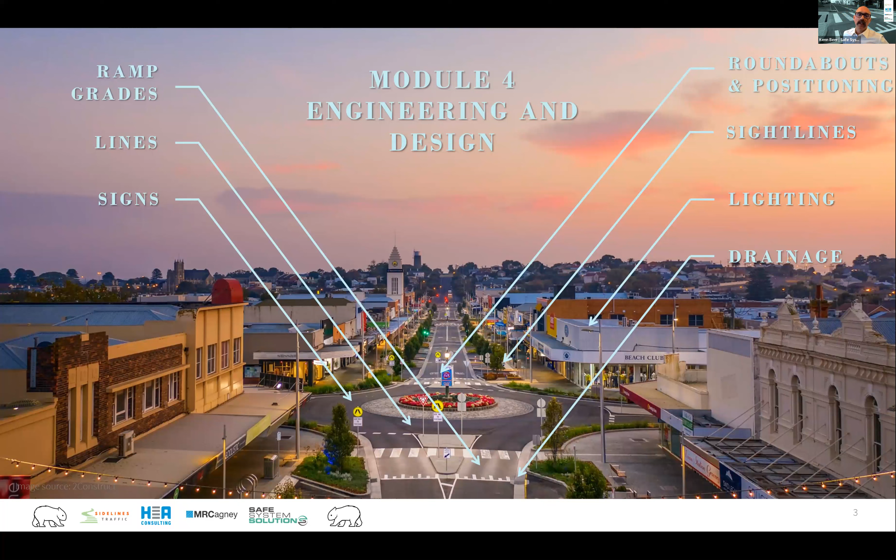So thinking about where we position them and some of the considerations—lighting and drainage I'll touch on briefly, and pavement as well, fairly briefly, just to give a few key insights. We better get into it.

I think Hafez, Prue and Bridget have done a really good job talking about design objectives at these different levels, from strategic planning objectives all the way down to general design objectives. I'm drilling in a little further than that.

We want to locate the crossings on pedestrian desire lines—the point where pedestrians generally want to be, that's the desire line. For pedestrians and cyclists, cyclists will go a little bit further off the desire line than a pedestrian will, but still we want to try to ensure that efficient, direct route. We've got to really factor that into our consideration.

We've got to think about all road users. I think Bridget hammered this home so well that I don't need to cover that further. High alignment with safe system principles means thinking about human tolerance to physical force, thinking about mistake-making, and thinking about some redundancy in the system. Hafez covered that quite nicely.

Then there's this idea that we want to think at a network level, about connectivity—Hafez's beautiful exercise of walking through, rather than just saying well we'll have one there and one over there, disconnected. We need to think about consistency along a corridor. So there's some overarching objectives.

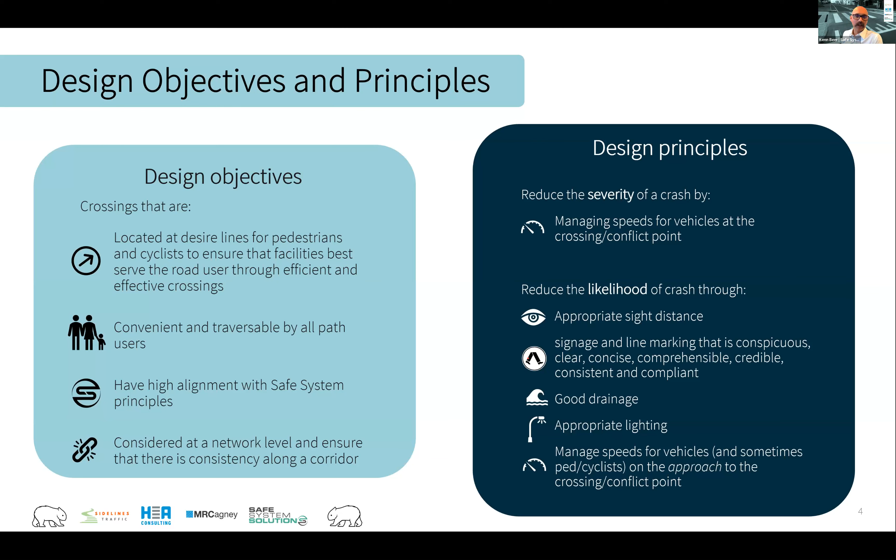Keep your questions coming in, and Hafez, at any time just jump in, because I'll just keep motoring on. So you're going to have to jump in on me at any point.

Let's start with one of those likelihood factors: sight distance. Sight distances to pedestrian crossings have been the point of recent debate at an Austroads level, with lots of Australian and New Zealand discussion going on. There were some recent changes in the Austroads Guide to Road Design, which I officially complained about, and they've now agreed to change them. I'll explain the approach they took as I go through it, and I'll explain both approaches so you can think about how to understand the sight distance requirements we've got.

Now you're all getting pretty good at the thumbs up or scary face on the Wombat. Here we go - we're up in Queensland, and we've got 2 carriageways approaching a zebra crossing, a pedestrian crossing. I just want you to give a thumbs up if you're happy with it, or thumbs down or a scary face if not. Oh, people are scared of this.

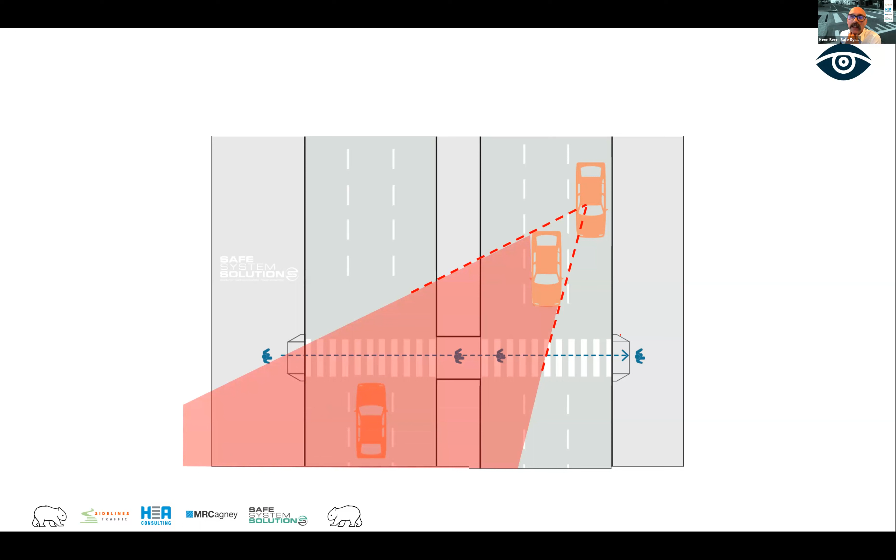Let me explain why that's an issue. If you've got multiple lanes - I've done this with 3 lanes to really highlight it - you can see pedestrians crossing with a car trailing behind. They have quite a big dynamic visual obstruction, what we call masking. So there's a whole section of that crossing they can't see. And if that car slams on the brakes because somebody's coming out, this other car may continue through, and we get that conflict. That's the concern.

What about this one? Now we still have 2 carriageways, 2 lanes in each direction. This one's on the approach to a roundabout, but this could work mid-block. You see here the other carriageway, and we've got our 2 lanes approaching a pedestrian crossing again. Let's see what we're saying - thumbs up or scary face, or type something in the chat if you want.

Looks like we've got a lot more people happy with it, Hafez. Yes, but you're creating some mixed views here, Mr. Ken. What is happening here?

For anybody still saying not happy with it, pop into the chat what some of the key specifics are, because there are always little tweaks that can be done. But overall, I'm much happier with this, because essentially we've taken that limitation - the dynamic visual obstruction, the sightline impediment of the other vehicle - and we've lessened it by providing a refuge island in the middle between the 2 lanes going forward.

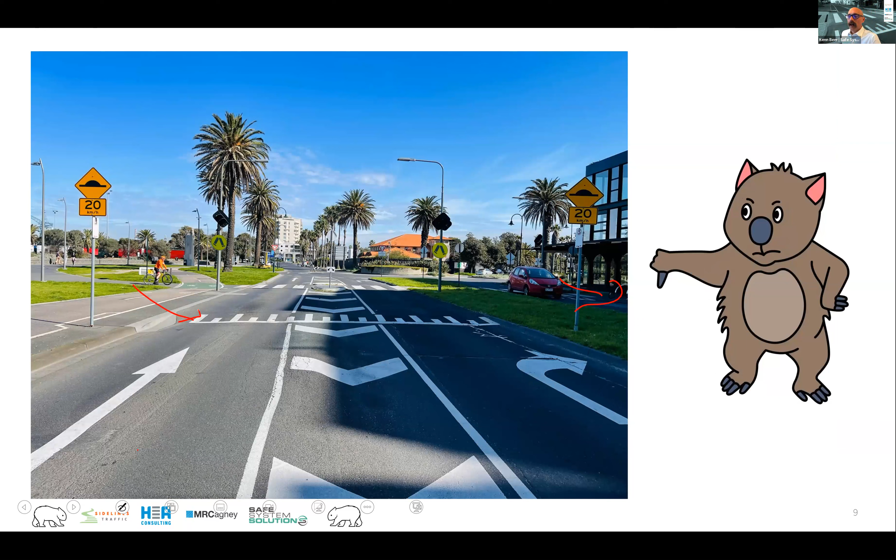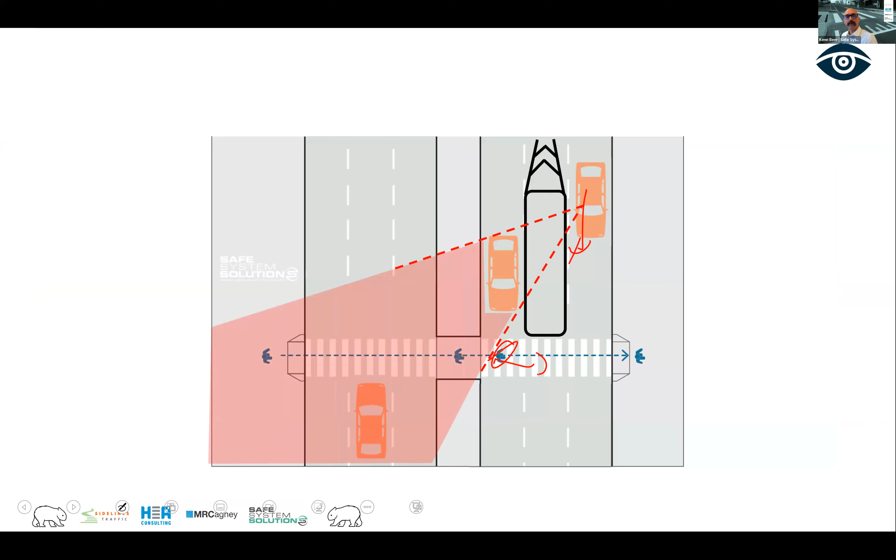So that was just the two-lane approach, which was the topic of a bit of discussion. I wanted to pop those in there so people had an idea. Of course, you can look to signalize a crossing. We talked about grade separation. The provision of an internal splitter island is going to be way cheaper than grade separation, even with your land requirements. But sometimes you really need to provide that continuity of flow for vehicles because of primary traffic route and the crossing for pedestrians.

Let's talk about sight distance and some basic fundamental sight distance on the approach to a crossing. I've got different types of sight distance up here. I'm going to take you through these. Some of you will get this as a refresher on sight distance calculations, some of you this might be the first time, so I'll go through from a very basic perspective. But we're thinking about approach sight distance, crossing sight distance, and stopping sight distance.

Safe intersection sight distance is the same formula as stopping sight distance, so some people might say that, but stopping sight distance is more appropriate to say in this situation.

Some key parameters we talk about for a pedestrian crossing, raised or not raised, a 1.6 meter setback. That's a point that's taken, and for the life of me, I can't tell you why it was picked exactly at 1.6. I will give a prize out to anybody who can tell me why 1.6 was chosen. I've always used it, it's in a lot of design standards. The other ones are 1.2 meters a second as a walking speed for a pedestrian, that's a parameter we use. And then we use this height of 1.07. I can tell you why that 1.07 - that's the height of a person in a wheelchair, which is an important consideration. It also covers off kids as well. That's a parameter we use.

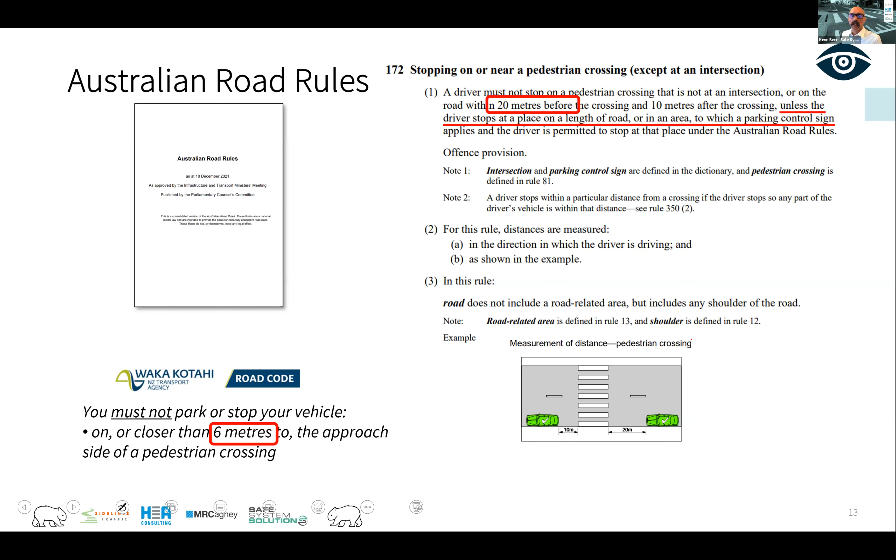Now in some situations this might be appropriate, but there are a lot of situations where it won't be. In some cases this is way too conservative, and we may not be able to get a pedestrian crossing or raised crossing in where we want it because people say we can't meet this sight distance requirement. In other situations it might not be enough, and somebody approaching will not have enough time to see, react, and stop if a pedestrian starts walking. So there's something to consider, but in both cases it clearly says you can deviate from this using parking control signs - we can just re-sign it out of that.

Okay, let's start by talking about approach sight distance. Approach sight distance is the same whether it's approach to an intersection or approach to a pedestrian crossing.

It is the driver's ability to see what is coming up and take appropriate action to the road surface. That's what we're looking at. So the driver should be able to see the line marking on the surface at the point they're looking, and we take that from a 1.1 meter driver eye height.

Within that, we've got reaction time, which we can use from the Austroads Guide to Road Design Part 3. We've got the operating speed, the 85th percentile speed in kilometers per hour of the vehicle. We've got a coefficient of friction or deceleration, which you make a judgment call on. And we're thinking about the grade, are we coming on a steep downhill or uphill? That's going to change things and factor things out.

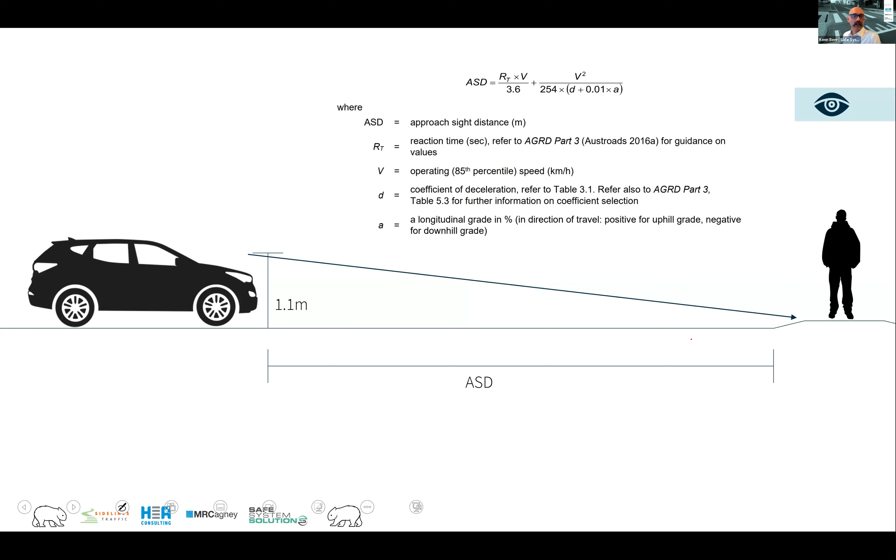The idea is that a driver approaching a pedestrian crossing should be able to see it in time to react, judge, and come to a stop if necessary. You might think that's pretty obvious, but if it's going around a curve, that becomes interesting in ensuring we can meet those sight distance requirements. So putting a pedestrian crossing around a sweeping curve is something we need to consider how we go about doing. Not to say you can't do it, just how do we go about it.

But let's use a straight road to talk about another sight distance requirement. This is what Austroads is currently requiring of a pedestrian crossing, and I'll explain why I don't think this is right. I mean, it's fine, it's actually more conservative, you're going to get bigger sight distances, but I don't think it's appropriate.

We use this thing called crossing sight distance, CSD. Crossing sight distance essentially says we've got our pedestrian here, and they're going to need to get from this point to this point. So the distance becomes important. We need to ensure they've got enough sight distance to see this vehicle and judge that it's going to stop, and that they've got enough time to get across the whole width of the road.

If you've got a refuge island, they need enough time to get to the refuge point. So the CSD, the crossing sight distance, talks about a critical gap in seconds, which is the length and the speed of travel of the pedestrian, which we talked about, 1.2 meters a second. They give a 3-second buffer in there now, and we talk about the approach speed of the vehicle.

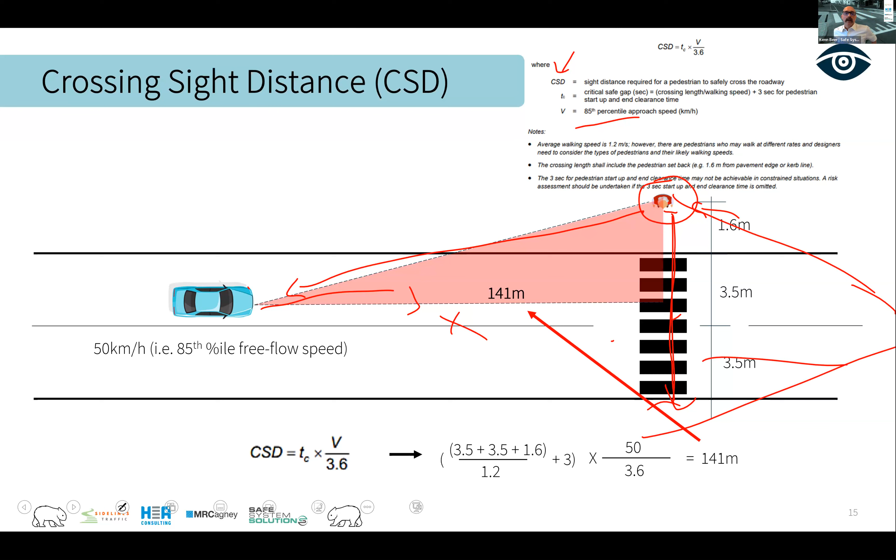Okay, so if we raise the crossing, they cross in both directions. Yeah, so somebody sort of said that. If we raise the crossing, this becomes interesting, then, doesn't it? Because what do we use as the 85th percentile speed? Right, so we had this 50 km/h, 85th percentile speed of free flow, but we know that they're not going to go over this crossing at 50 km/h, are they?

But their slowing down happens at a certain point along this road. So if there's no pedestrian there, for example, they're still going to slow, aren't they, to go over this? It acts like a local area traffic management device. It's a speed hump. Okay, so we need to now start thinking and factoring that into our consideration. So at some point, they're going to slow down regardless of whether there's a pedestrian or not.

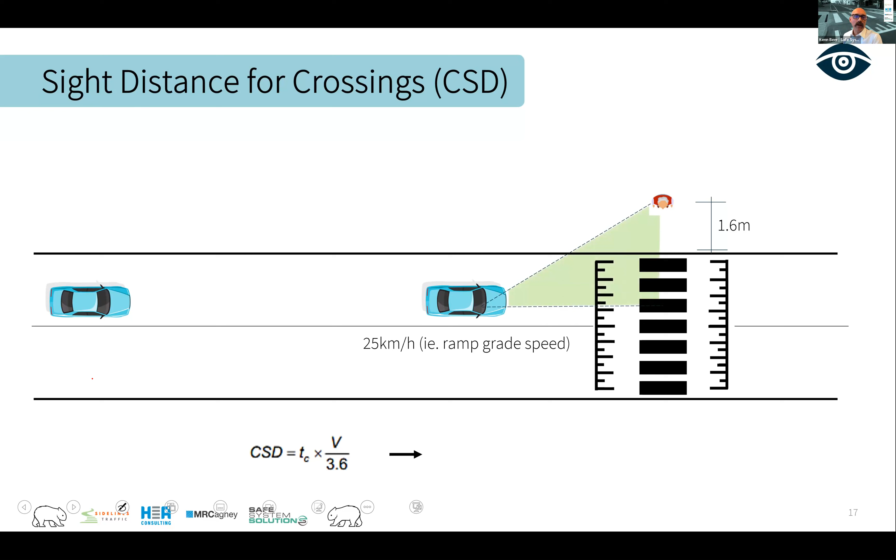And say that we've designed the ramp grade, which I'll talk about how we make this consideration later, to, let's say, a 25 km/h ramp grade speed. They should get down to that speed. And so one theory would be that you could just simply take a 25 km/h 85th percentile speed and use that for your calculations.

And then you could calculate that out at about 71 meters. So obviously my diagrams are exaggerating everything just for visual effect. Okay. But the reality of it is that, and I'll show this in a future slide, a vehicle sort of slows at a point and then makes a decision at a decision point. Okay.

The reason that this use of crossing sight distance is not appropriate for pedestrian crossings, and why I lodged my complaint which has been accepted with changes happening, is because the time it takes for the pedestrian to cross that road is irrelevant, right? The key thing is for that driver to see the pedestrian approaching, and then have a good amount of time to slow and to stop. Then it does not matter how slow they walk and how far they have to walk, because that driver waits until they're past and it's safe, right?

So while crossing sight distance provides bigger sight distance triangles, and that's great at an individual site, you go, great, okay, well, what's the harm of being able to see the pedestrian further back? Like, that's got to be good. That's got to be safer. The bigger the sight lines, the safer it is. Well, that's sort of true at an individual site.

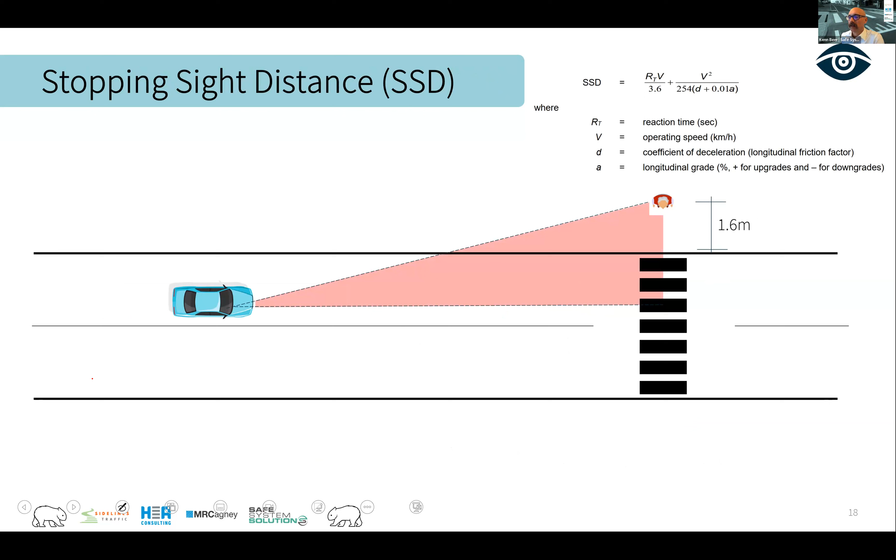Okay, Hafez, before I jump into this, let's have a question. So two questions. So, why is ramp grade speed asked by Serene? Why have you used that ramp grade speed? Yeah, I'll explain why I've used ramp grade speed using this slide in a second.

And also, just to confirm, Farhana is asking, is that 71 meters the summation of the side lengths of the triangle? No, that's the distance. That's the distance from the vehicle, front of the vehicle, to the crossing point. It's actually the point of conflict there. Yeah, that's that distance. Yep.

Okay, so here's what actually happens when you've got a raised crossing, okay? So the driver, assuming that they're coming in at an 85th percentile operating speed of 50 kilometers an hour, right? They see the crossing, right? At the point that they can see the crossing, right? They're preparing themselves to slow down because of the raised nature of it, not because they can see a pedestrian, right? They've got to navigate over something that's raised. So they start their braking process, right?

They'll get down to a speed they're comfortable going over the raised crossing, and that's what I'm calling the ramp grade speed. That's what we'll put as the advisory speed on the raised crossing sign, associated with how steep the grade of the ramp is. So they get down to that speed, foot on the brake, and there's that specific point where they'll say, oh, there's a pedestrian there, I'm going to stop. Or there's not, and they go over the ramp and accelerate.

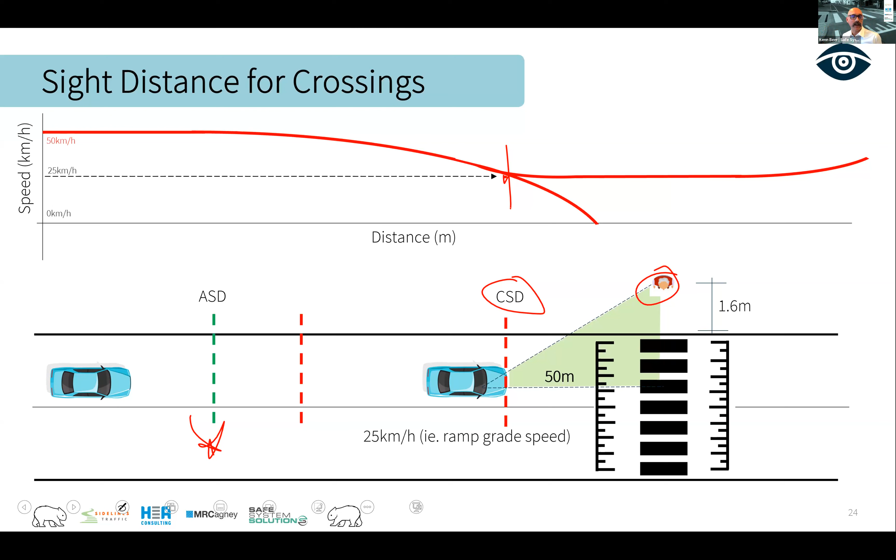And there's significant differences in the sight triangles, so they sort of bookend what you'd be thinking about in terms of sightline triangles. Now, things that are blocking those sightline triangles - we see trees, shrubs, different controller boxes, bus shelters, and bits and pieces.

But the big one we see, as has already been pointed out, are parked vehicles. Now if you ever get into some obscure clause that says a parked vehicle is not a sightline impediment because it's not always there, don't just stop - that's ridiculous commentary. Somebody's found something buried away somewhere, but that's just absolutely not right. Of course it's a sightline impediment.

I'm going to jump past that one. So

We had a wonderful idea of what we could do if we can't meet these sightlines because of parking - that would be some sort of kerb outstand or curb build out, depending which side of the ditch you're on. You can see that 1.6 setback has been pulled forward, so our parking can press up quite close to this because we've pulled the pedestrians out at a point where they're more visible and easier to see. That's a great little solution for where you can't quite meet these.

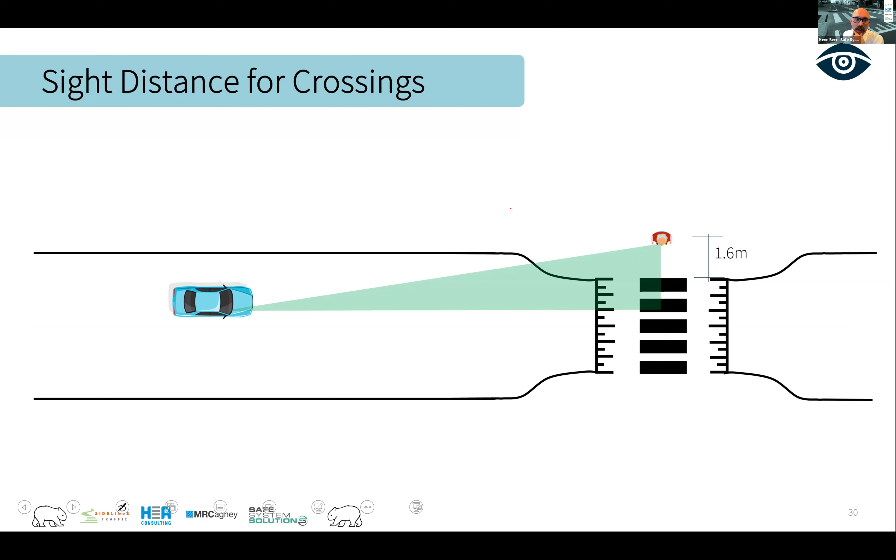So that's one option. If you can't meet that, I suppose, has anybody got any other ideas? If we can't meet that, as I sort of overlay the other sort of sightline impediment - I mean these are just mock-ups, so when you actually get out there and pace it out and work it out, it's a bit different. Anybody got any other ideas?

So Peter's asking a question about shared path facilities - that's coming next. And okay, Zachary's suggested lowering the speed limit. Good, that's an option, and it might bring down the 85th percentile speed on the approach.

Some things to try to enhance the visibility of the crossing itself - signing it, different signage, a refuge island potentially. These are all things you could possibly think about in the design, but really we can look to slow this vehicle down on the approach, further back, through speed calming, speed humps, speed cushions. So we give them almost double slowing down if you really are stuck.

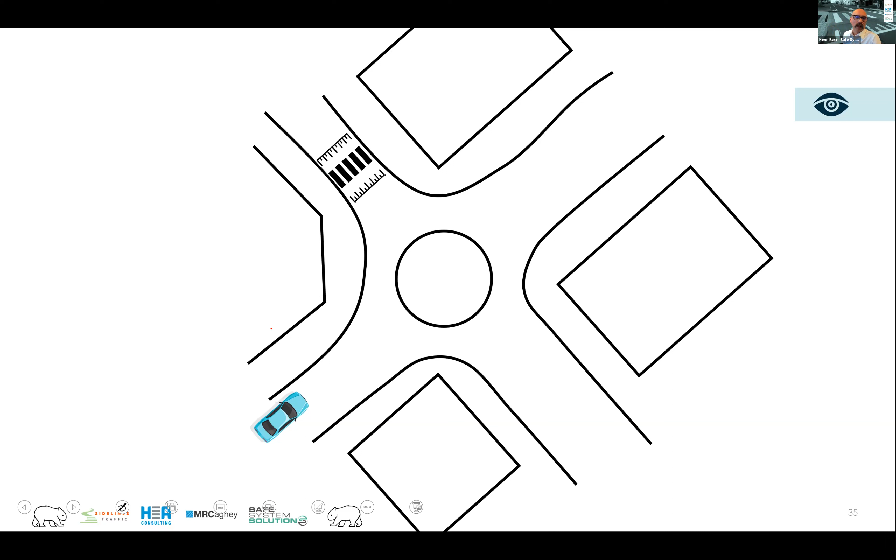Yeah, so you could think about reducing that 1.6 requirement, bringing it back to less. We see this interesting play out in pedestrian crossings at roundabouts, because you're taking a sharp turn. Often you'll have buildings built up right to the blocking sight lines there to a pedestrian crossing point if you set it back like that.

But an important thing to remember on this is you're talking about 85th percentile speeds - you're not talking about free flow speeds back here of approaching vehicles or speed limit. So the mechanics of a vehicle going into a roundabout is that they slow down significantly. So that's one thing.

The second is that if you can't meet crossing sight distance or stopping sight distance, if you can meet approach sight distance, so that's the vehicle being able to see that there's a crossing there, the vehicle will take action to ensure they can see if somebody's crossing, as long as that's a well-positioned and well-highlighted raised crossing. Most of the time, using the operating speed of somebody navigating a left or right turn at that roundabout, you discover the sight triangle is actually really pretty low.

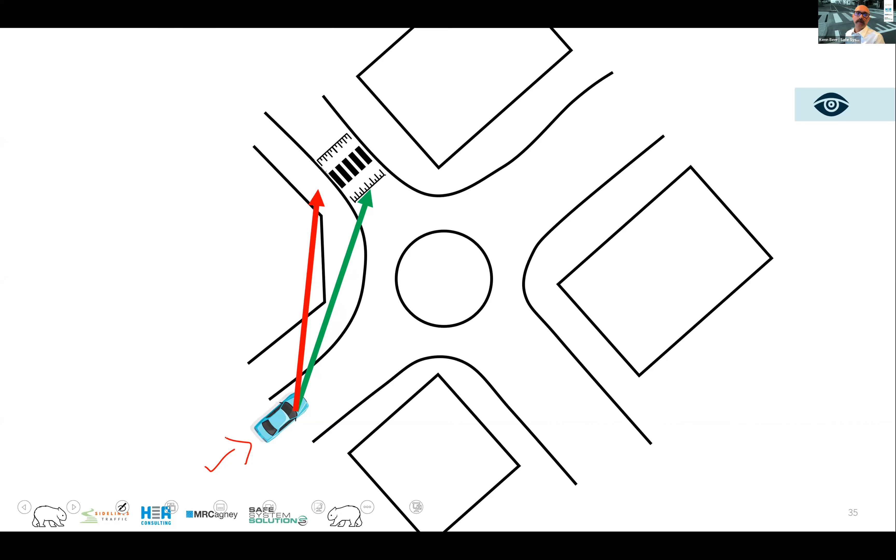If you are doing that, raised crossings on all approaches reinforce that lowering of speed at that point. So our sightline triangles open up significantly because we've enforced that speed lower. If somebody wanted to take fast sweeping left turns around this roundabout, well, we've slowed them with traffic calming on the approach, and we're ensuring the sight lines and sight triangles open up.

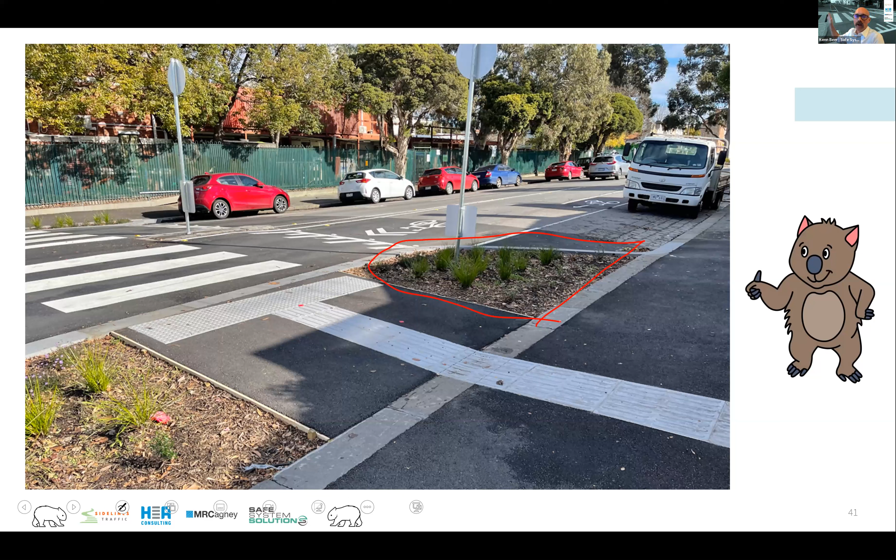Now, we just need to remember that that's within the sight line, and we want to think about that height, that we don't want any impediments. The rule of thumb there is sort of 0.5 to 1.5. Keep that clear and ensure the sight lines are there. Now, why don't I use that 1.07 that I talked about for a wheelchair eye height? Well, if you took the 1.07, then somebody in a wheelchair approaching that, all you'd see is just the little top of their head motoring along.

And so that's not what we want. The reason we talked about 1.07 is the ability for them to see under a crossing sight distance requirement. But 0.5 to 1.5 is industry practice on what you need to make sure you keep clear. So low ground cover, fine, and then maybe a tree canopy sitting over the top, but not using that as your display of

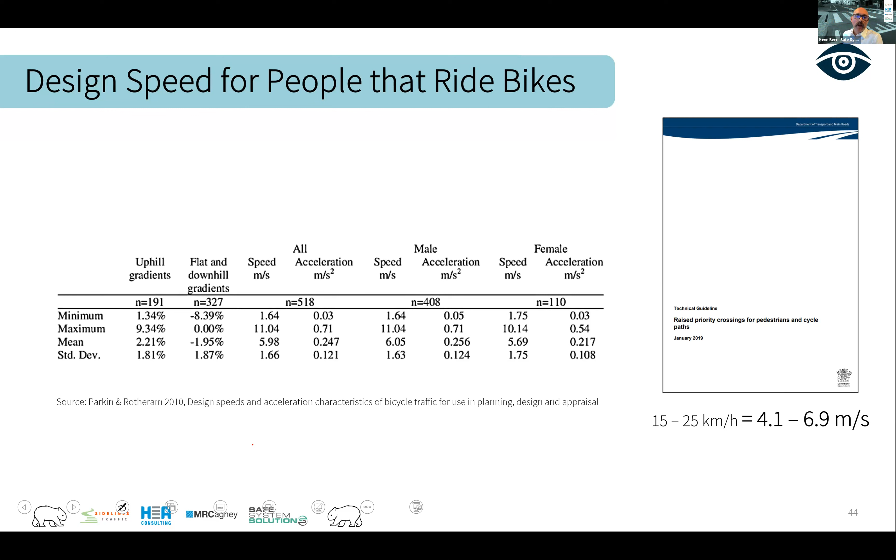So we're going to factor that into our thinking as we calculate sight lines for these shared path crossings. We popped some figures in there.

Now, if you have separated facilities like this, providing priority for cyclists in their own dedicated crossing and pedestrians separately rather than a shared path, you're going to do sightline calculations on your faster vehicle, which is the bike. You're going to try and ensure you're creating that sightline for bikes crossing there. If it's a shared path, you're still thinking about the bikes as well.

So that's becoming a bit of common practice around Australia where you do this, and New Zealand actually as well - New Zealand's doing a fair bit of this. So we do need to think about that sight line for the cycleway itself.

Hafez: So Ken, usually in your practice you're very cognizant of differences between jurisdictions in Australia and New Zealand. We have a comment here from Manish - any particular reason why tactiles are grey or silver? It's yellow for peds and green for cyclists in New Zealand. I think it's about 2 or 3 slides before.

That one. No, oh, this one. Sorry, yes, this one. Yeah, okay, the tactile ground surface indicators - we are not specific on color, but they should contrast the pavement. So they're not contrasting enough there, which is something that should probably be rectified. But yeah, I don't know why we don't have a specific uniformity in the color of those.

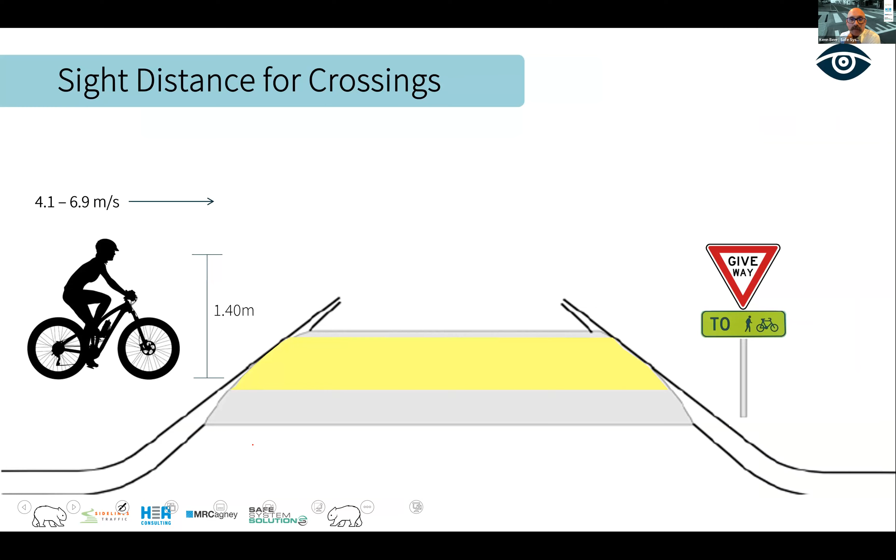In terms of the color of pavement, green is for cyclists, yellow is for shared path facilities, and red is for busways. That's pretty consistent across Australia and New Zealand, but somebody can correct me if I'm wrong on that.

So how do we work that out? How do we work out what those sight triangles are? Again, it all comes back to that stopping sight distance. The thing is, we want to create a sight triangle that means a driver has time to see approaching cyclists and make that decision. But we also want to ensure cyclists have time to see that vehicle, and if that vehicle is going to overshoot, that we have time to take some evasive action.

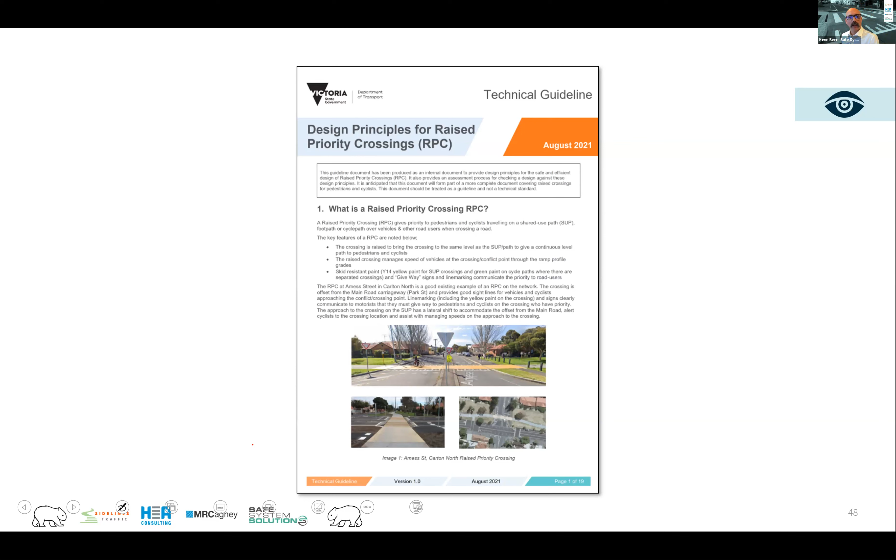But the sight distance requirements, based on safe intersection sight distance or stopping sight distance, we talk about these travel times, and that's about different scenarios. Is it a high-speed environment? Is it a low-speed environment or a very constrained environment?

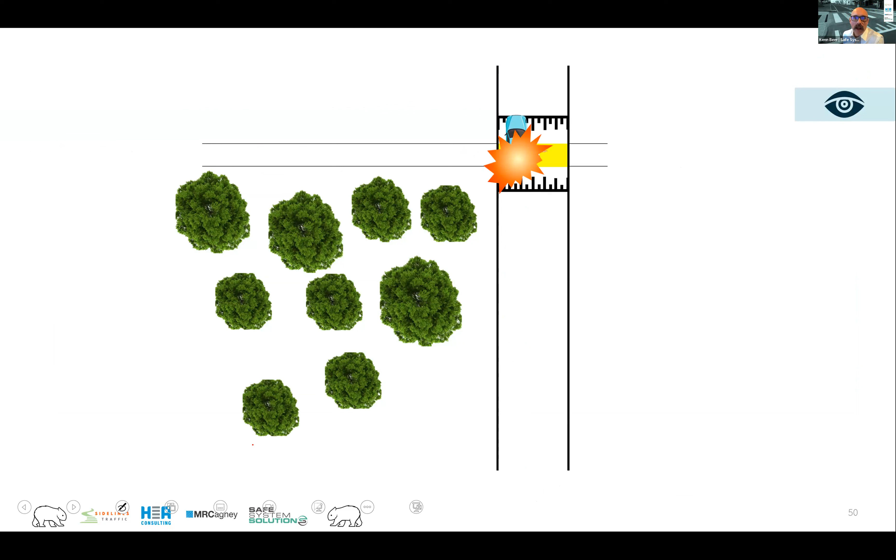I'll come back to this in a second, but here's the theory, right? A vehicle comes in, a bike comes in, they couldn't see each other, they're both traveling along, and we've got a crash. So we don't have the appropriate time to see, to avoid, to react. Hopefully that would be slower because of the raised nature of it, but the bike's going to be coming in at speed as well, so we've got some challenges.

So you open up sight lines to some point, and we're going to call the distance back from the conflict point for the cyclist A, and for the driver C. I'll use a B later. The idea is if we cleared and opened up that sight triangle, the driver should stop because they saw the cyclist coming and let them go. But also, if that cyclist identified 'hang on, I saw that car coming, it's not slowing down enough,' they should have enough time to make that emergency braking maneuver.

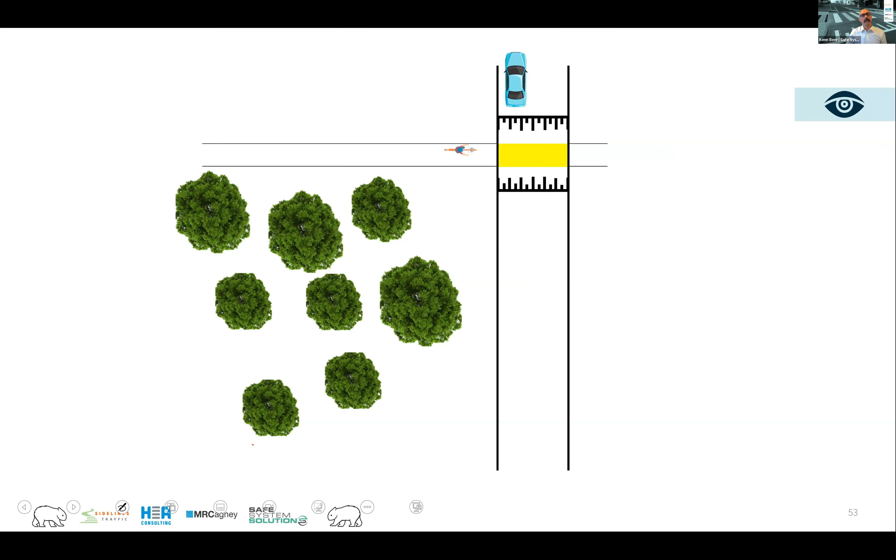We often run a shared path facility or a cycleway alongside a major road. It's a beautiful spot to do it because you've usually got a bit of land, it's a nice corridor. Especially when we're upgrading roads these days, people are more and more considering the need to provide facilities for active transport, which is wonderful. So we've got this corridor, but we've got to think about how do we create this appropriate sight distance for these crossing points, which is where all the side roads come into the main road.

This is where I'm going to use B. B is the distance from that point of the vehicle back to the turn point. So we want to create all of these sight lines, and I'm going to call it like a sight envelope. We want to keep that free of hazards, because you can see all of those different points of requirement for different turns and different directions that bikes could be coming from.

So we use a curb return of 20. Now that works generally pretty well. If it was a massive sweeping curve, you might need to adjust that, but generally that works quite well. I'm just going to finish off these sight lines, and then we'll take our little break and check in on any questions. But let me just show you how to actually calculate these.

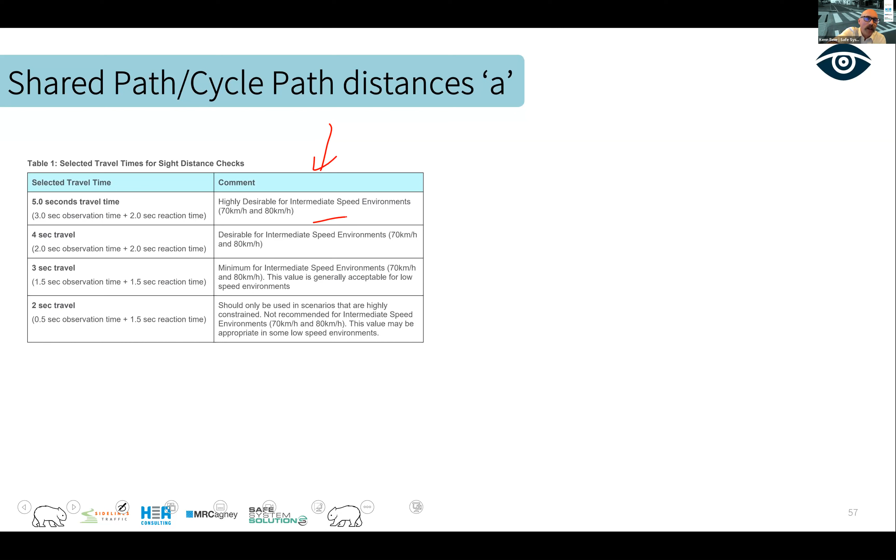So to actually calculate these differences, A, B, and C, we decide on the scenario. Is it a high-speed road? Is it a low constrained environment? You pick one of those, and then select a travel time.

Then we work out A based on, is this a high-speed cycleway? 30 kilometers an hour we'll take as a speed. Is it a fairly straight generic shared path facility? We'll go down to 20. Are there maybe some chicanes on the approach, or are the riders going slower? We might go down to 15. So you get a bit of decision on that.

And then you've got your selection on travel time based on the scenario from over here, and you find your distance back for the cyclist. You do the same for B using these other tables. As I say, you could calculate this from first principles yourself using stopping sight distance calculations if you want — these tables are just there to make your life easier.

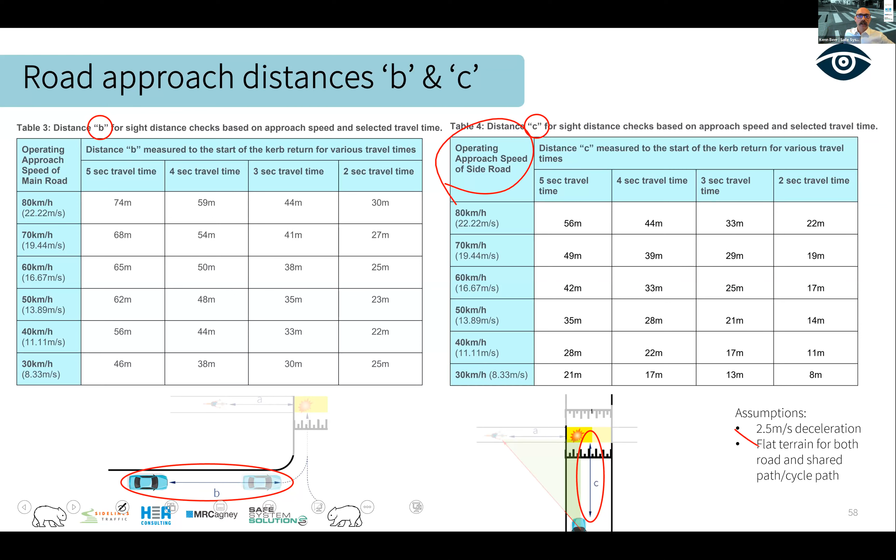And for C, again, we take based on the operating speed of the approach and our scenario travel time. There's a few assumptions in there: flat, 2.5 meter deceleration. So in this scenario, if we select a 3-second travel time, we've got A at 17 back, we've got C at 21 back. That creates your sightline triangle, which we should try to keep free of fixed hazards — fixed sightline impediments, I should say.

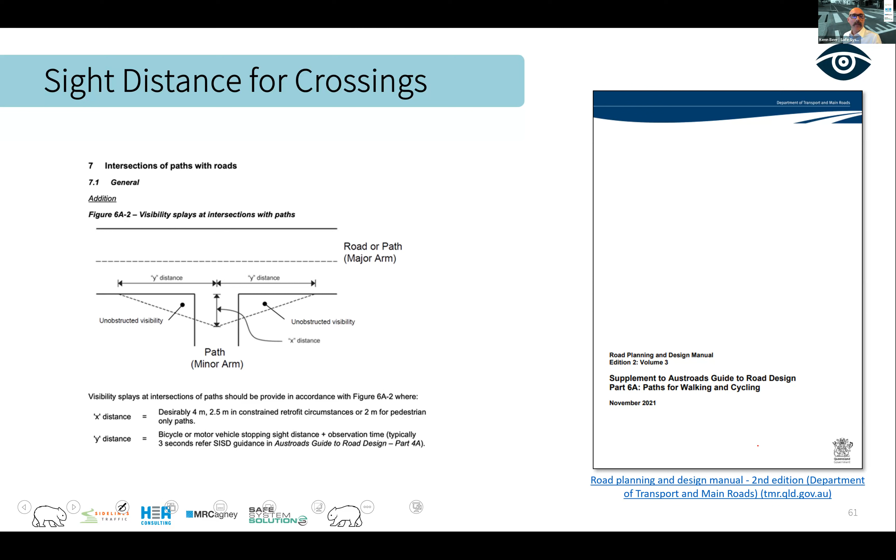Couple more slides on sight distance. There's specific jurisdictional nuances. The TMR guidance, the supplement to the Austroads Guide to Road Design Part 6A, Walking and Cycling, talks about some setbacks of 4 meters on path arms, which is relevant in some situations.

And what do we do if we can't provide that? We've calculated the sight distance and we just can't provide it — like there's a building in the way, or there's a tree, a big shrub that's super important and we're never going to cut it down. Before you go to abandoning the idea of priority crossings, there are things we can think about.

We can implement speed management for the cars to reduce speed on the approach — speed humps or other means to slow that vehicle. You could also reduce the speed of cyclists on the approach, with raised platforms for cyclists, chicanes, or others. You might decide to select lower travel times in those scenarios. And then you're into the point of saying, well, maybe we need to reconsider and provide a signalized crossing point or some other features.

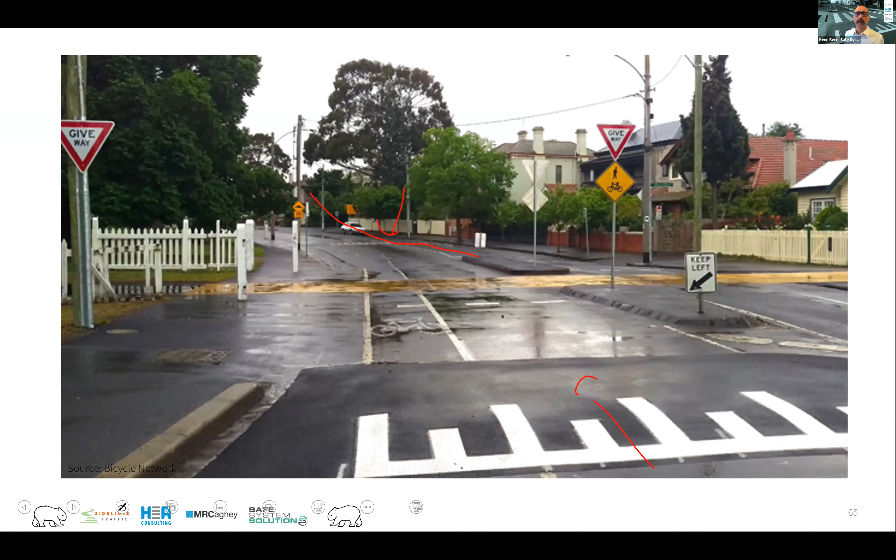So here's raised features on the approach to address some of the sightline challenges. This was also because of some drainage issues, but you can see you slowed the vehicle here before it's getting there, and slowed on the approach to the crossing point. That's pretty good. This one was interesting — even though it's quite low, they went to a stop sign because of some sightline challenges. To me, that's the lowest on effectiveness of control, but an interesting one to consider.

Okay, we'll give them a little bit of a break — Hafez, do you want questions now, or?

Just one comment, one question. I know you'll be talking at some stage about the color of some of these crossings, so one question about that — I'll leave that to you to answer when the time is right. Also, Paul here has a question — maybe I'll paraphrase it: what is the highest speed environment that you have seen or done a priority crossing on?

60 km/h speed limit — we did reduce the speed limit from 70 to 60 in one case. You really want to calm it down and make sure you're doing that. But we've certainly done raised facilities on higher speed roads — raised intersections, raised approaches to roundabouts and things like that on 80 km/h roads. You need to be very gentle with your grades early, giving people a low ramp grade and then a sharper one a little later, slowly bringing their speed down. But yeah, it's an important consideration.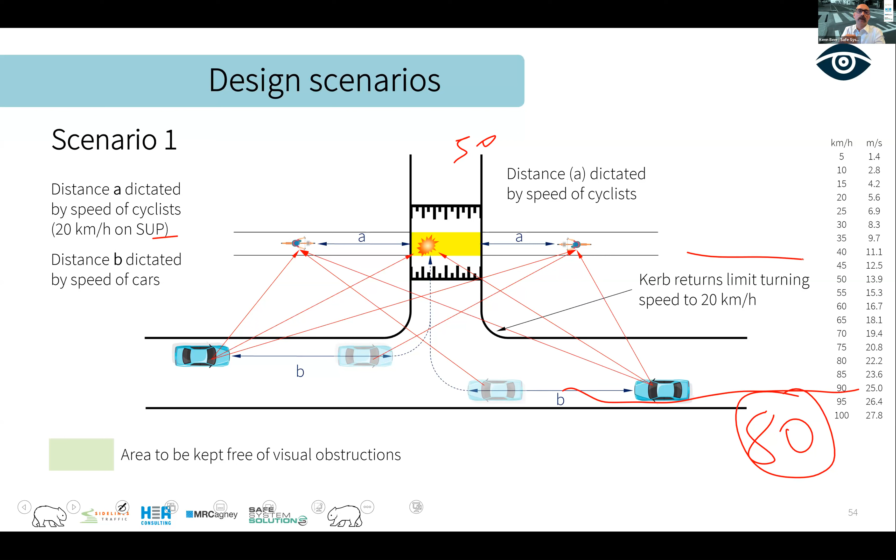So I'll show you the situation where you would use 80. Let me go back to it. This. The reason you use 80 is that if this was a massive arterial running at 80 km/h, okay, this might be a side road at 50 or something like that. But you need to factor in the speed of a vehicle approaching here at 80. And yes, it's great to have a shared path facility or a cycleway next to an 80 km/h road, because we do not want to put a cycle lane on that. That's just not going to be aligned with safe system principles. So that's the reason for having 80 in that table.

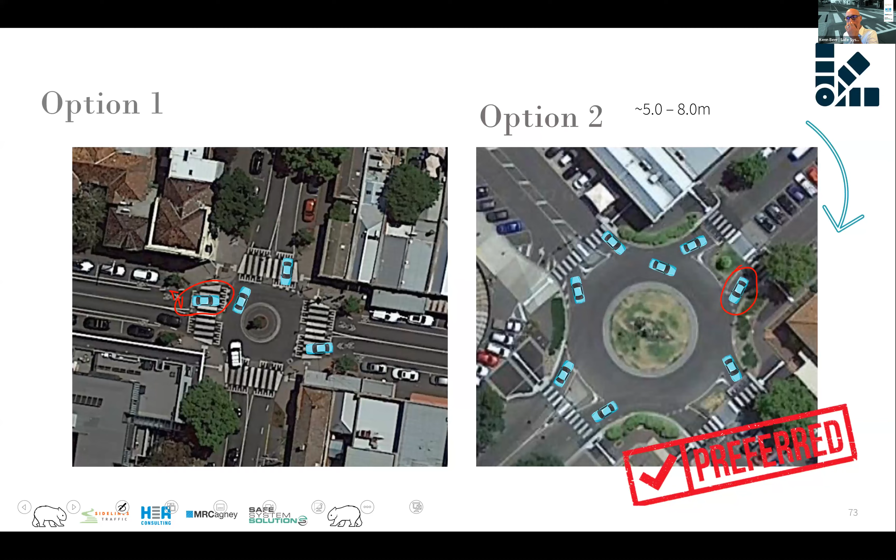So here's an example of option 2 that we talked about, where you can see that the vehicle can approach, a pedestrian can be crossing, then they sort of roll over the raised crossing, propping in there waiting to enter the roundabout. And here's the second one, where we've got the crossings right up at the hold line of the roundabout, and vehicles waiting won't really be able to navigate through. So they're both legitimate options. My concern is more about that vehicle entering the roundabout, propping on the crossing as they wait, and pedestrians walking around it, which is something for consideration.

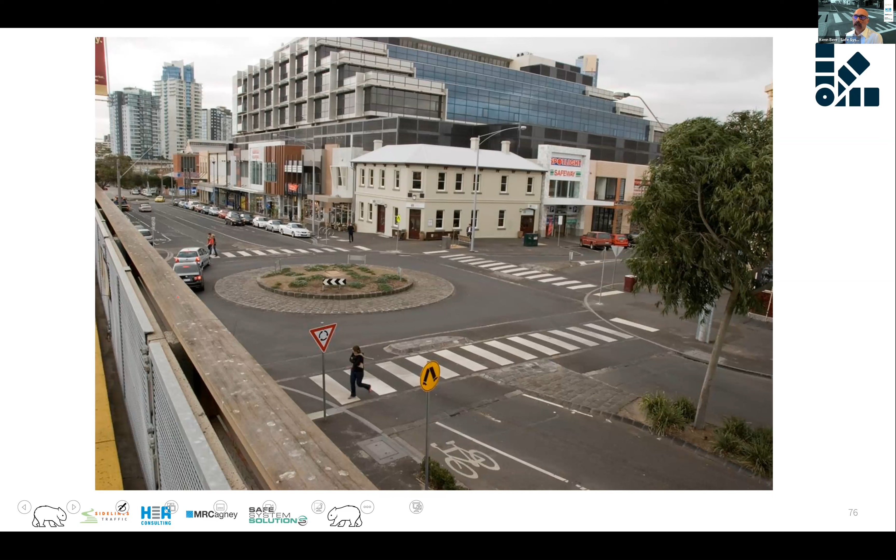The angle of approach. Pretty much anything we raise on the road network, we want to try to ensure it is perpendicular to the path of travel. The reason for this is predominantly around heavy vehicle stability as they navigate over it. You don't want one wheel to hit first and then wobble the whole vehicle. There's also motorcyclist consideration, since motorcyclists have a bit of lean as they navigate around, and we don't like to provide any vertical deflection while they're leaning. So we really want to create that perpendicular setup if we possibly can.

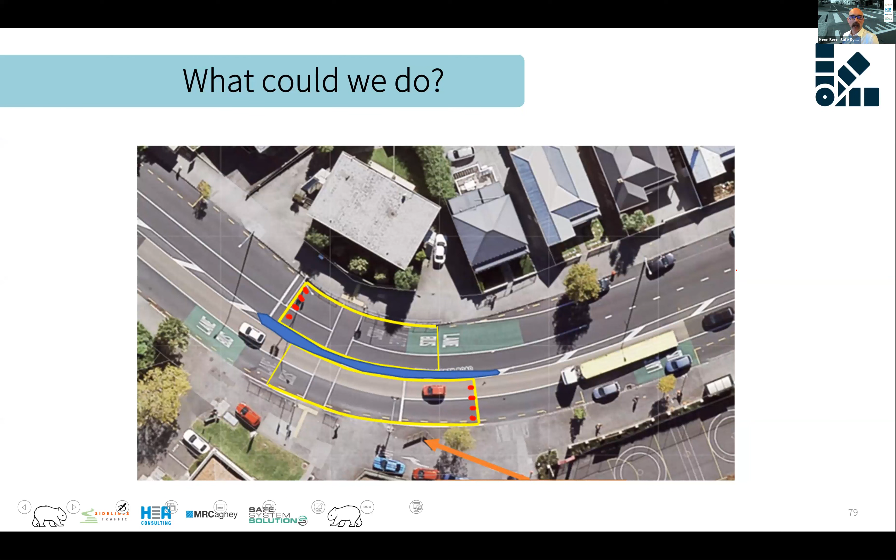Okay, so we've seen lots of good ideas there. Everything from putting humps on the approach where it's straight to slow vehicles down, to splaying or altering the raised section, putting in two humps and the like. So those are certainly options. They went with the splay there, spreading it out and angling it so it's more perpendicular, which is good. Or you could be extending them out, utilizing splitter islands in the middle. Or, I do like the idea, if you're really struggling, to just put the speed calming on the approach and then know that at the crossing they will be going at lower speeds.

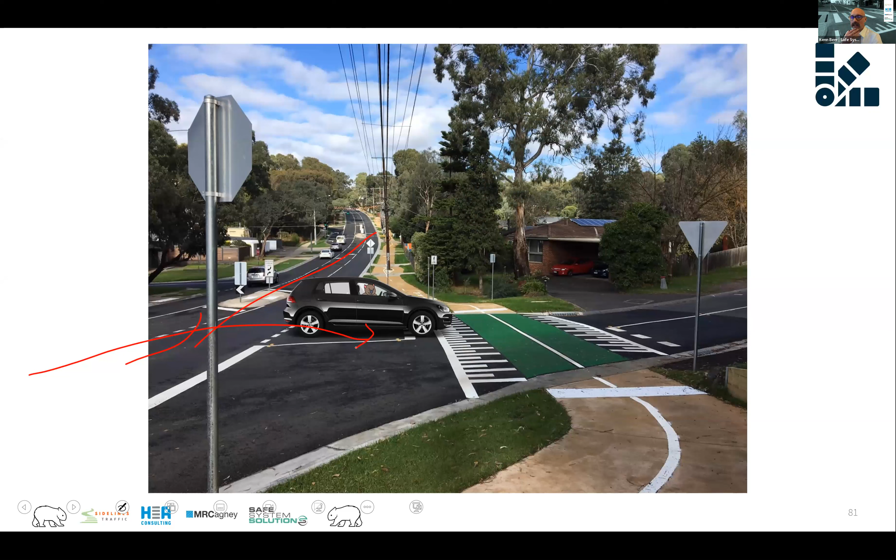Do cyclists and peds have priority there? Oh yeah, so this is a cycleway priority, and it's trying to provide... well, it's a bit hard to see here, there's a give way, so it is providing that priority for this. And then you get up to here, and then you've got to wait for priority there as well. It's a bit of an odd setup.

Okay, ramp grades, here we go. Lock in, because we're going ramp grading.

Like the basic theory on it is the sharper the ramp grade, the slower vehicles are going to go to navigate over it. Now how do they know what it is? Well, we provide them with some advice on what they should do, so that helps. But they'll go over it once, and they'll get a good feel for what they can do, and then the next time they go over it, they're going to adjust accordingly. So we know that the bulk of drivers are repeat users of a road.

So if we design something with a very shallow ramp grade like this, but we sign it like this one, the first time they go over it, they might go 20. And then the next time they'll go 30 or 40, and then they'll go, no, this is about a 50, and that's what I can go over it at. And they'll just continue to do that. So the ramp grade's good, and there is a bit of information about it.

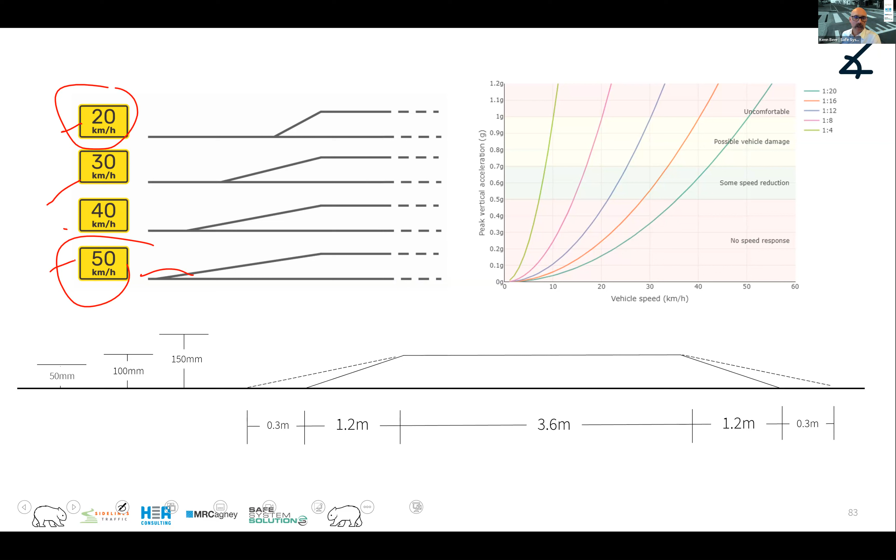So you can see, I'm going to show you lots of different sort of ramp grades. The 3.6 with this is like a stock standard raised crossing, 1.2, 3.6, and 100 mil high. I'll use that, and then I'll start to adjust it for different scenarios.

So who knows the ramp grade of this? It's 100 mil high and it's 1.2 meter long ramp grade. Who knows what that is? What's the ramp grade there? Now we do grades in like 1 in this, not a percentage. For some reason, I don't know why we ended up doing that, but we do 1 in... thank you, 1 in 12.

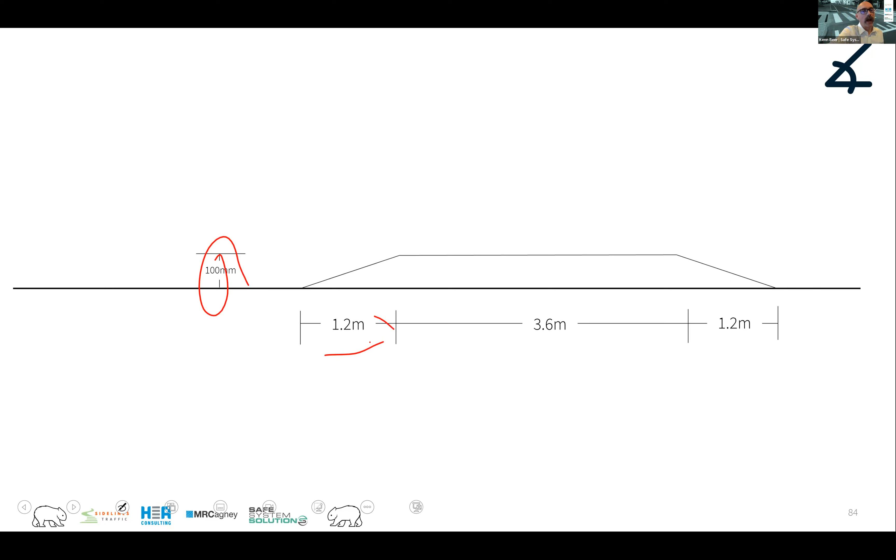Somebody's on it, yeah good, now they're all coming through. 1 in 12, that's right. So it goes up 1 to 12 long, so 100 to 1,200. So it's 1 in 12 is the ramp grade of that.

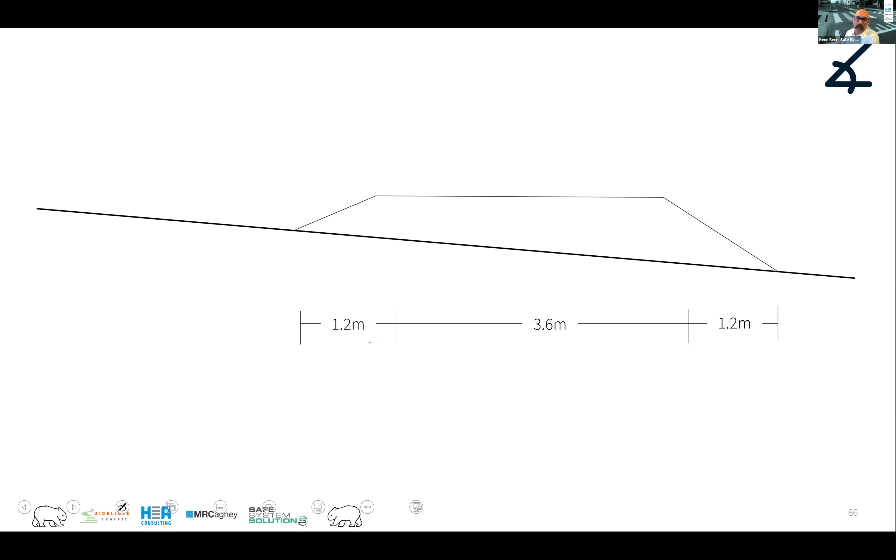Now, when you're thinking about ramp grade, you're thinking about from that, what is the angle essentially. So if you're on a slope down or a slope up, your ramp grade will change. There's something just to factor into your thinking.

But then we understand from some great research and lots of people running lots of vehicles over ramp grades at different speeds and having accelerometers and understanding what we're expecting to see out of this, that we will get vehicles within that some speed reduction range. That's where they will find themselves. So these different colored lines show ramp grades.

And we can then say, alright, 1 in 12 was what we had there, we are going to get around that low 20s as the speed vehicles will be going through there. So then we can sign that a 25 or a 20 if we want. If we flatten it out a bit down to a 1 in 16, well then we would be thinking around the 30, a little bit over 30 might be the speed that vehicles will travel through there. And you can then get an understanding of what our expectations are based on this.

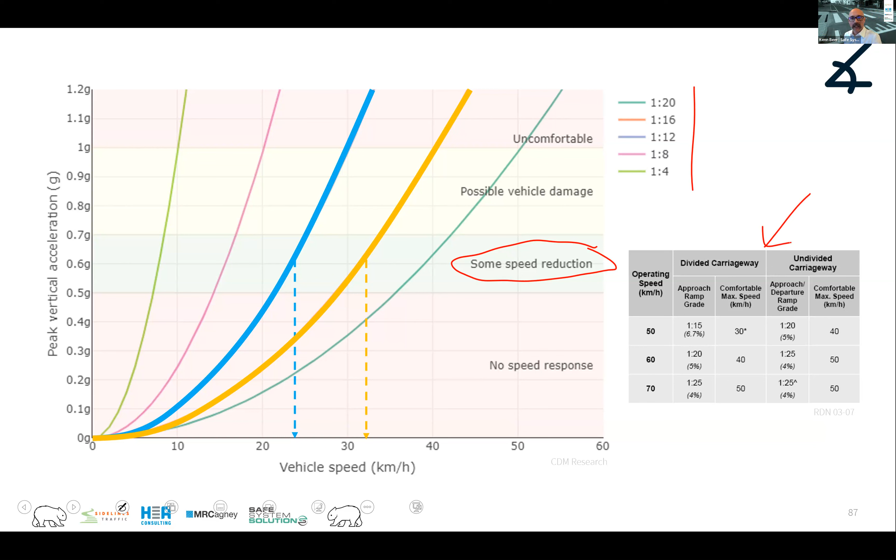Now, the graph there sort of goes up to a certain point. If you want to go higher speed scenarios, we've got some further information there, which comes out of a Victorian government document, raised safety platforms, and yeah, you can get some information there.

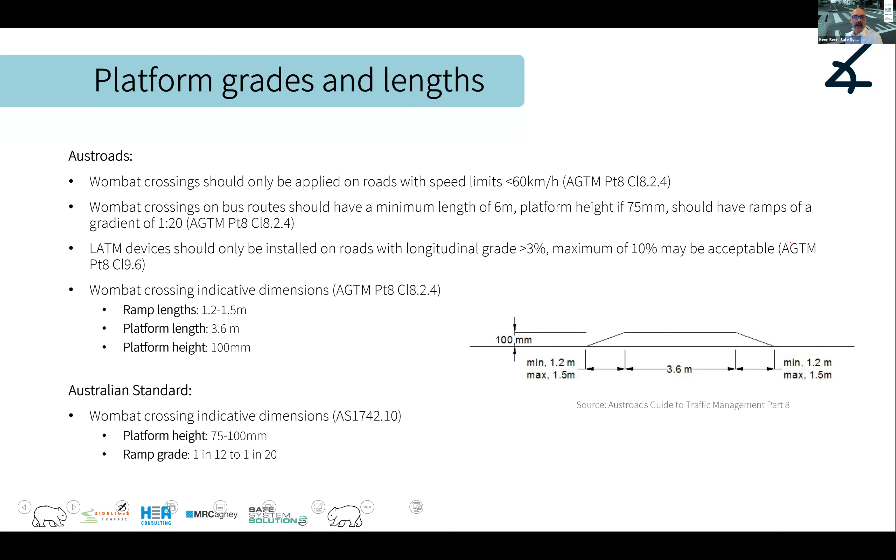Now, to save you the time of sort of digging through your local jurisdictional guidance, I've collected the different information that your jurisdiction will talk about. I started with Austroads information there, there's lots of info in there, then some Australian standard stuff, some specifics on TMR. I mean TMR, like this is quite amazing, 150 mil high, and I'll explain why that is later. And then we've got the Waka Kotahi NZTA information there as well.

Okay, let's have a think about this. We've talked about a 100 mil high ramp or platform, which is pretty standard height, and that 1.2 length. So that's a very standard one. But for different reasons, you may want to alter this. I'm talking now from a principles perspective. I know each jurisdiction likes to do their own nuances, but we'll go with general principles, because we can design to general principles even if it doesn't meet your local jurisdiction in some situations.

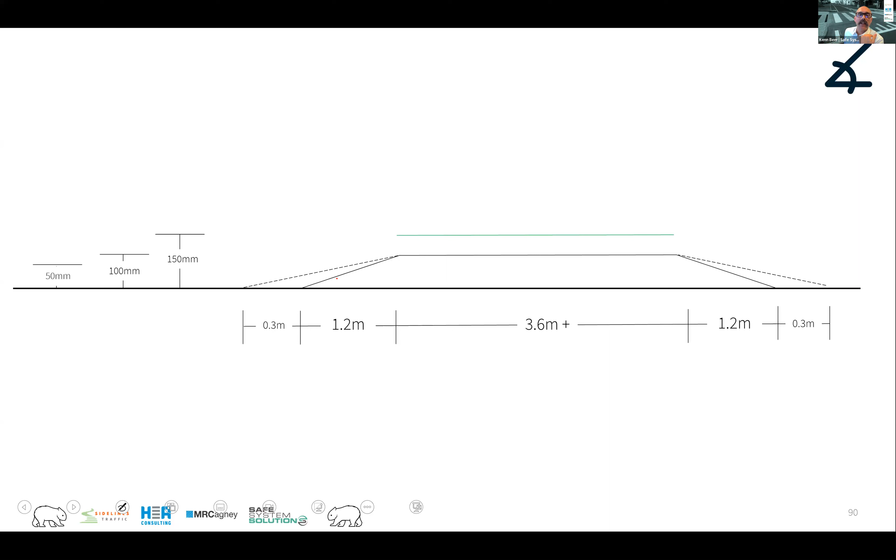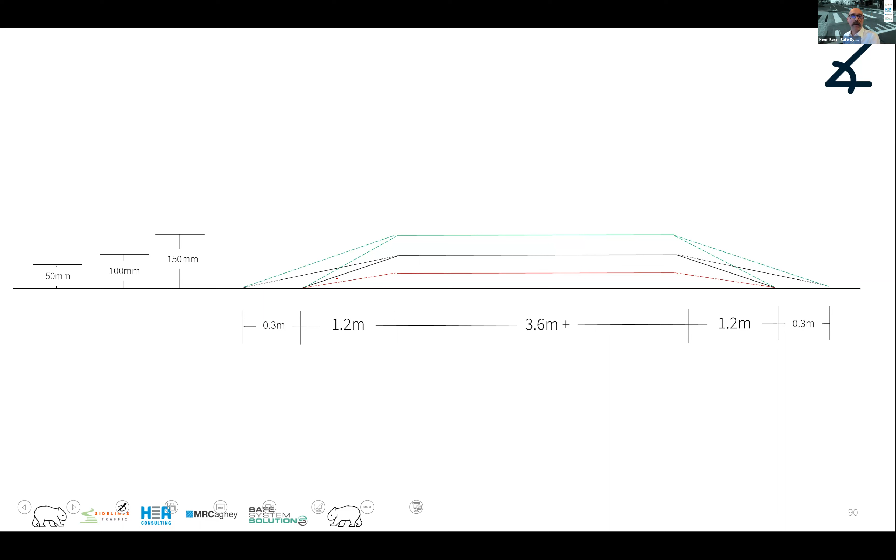You could lengthen your ramp, which would flatten it out and make it easier for some vehicles to get over. You could make it higher if you're in environments where you really want it to stand out, maybe linking with higher curb height. If you have short ramps and very high, it's going to be very steep and slow to navigate over. We might have troubles with some lower vehicles. Then down at a 50 or a 75, we're seeing a lower ramp that'll be shallower. So there's the theory on how you can adjust things.

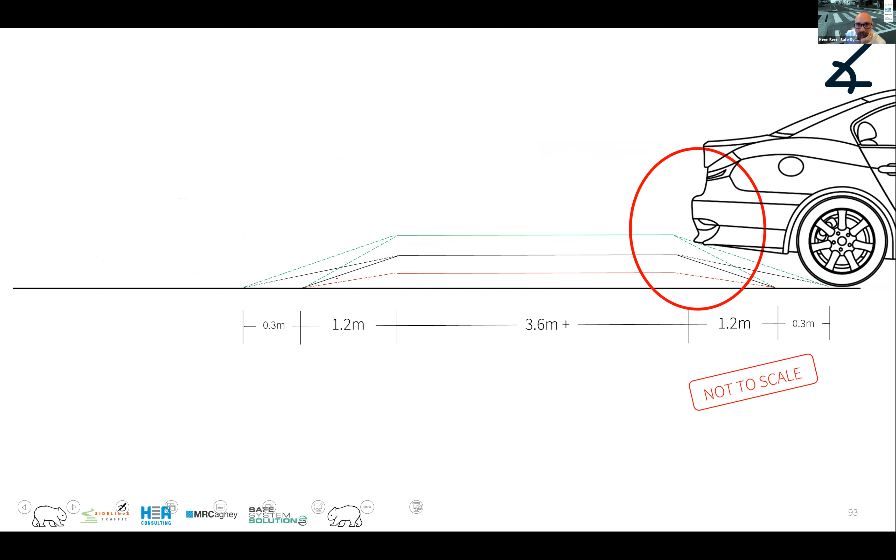But the thing we've got to consider is that a vehicle is going to approach this, and we have challenges in a number of situations. The vehicle can bottom out approaching it, as the nose hits it. We can have vehicles get stuck on ramps or bottom out as they go over. The back of the vehicle can scrape as they've gone up onto it, and then the back can scrape again as it comes down. So these are all things we need to factor into our choice on ramp height, ramp grade, and the like. There's also the possibility of nosing out, but if you nose out, you've probably nosed into the ramp, depending on how it's been done.

So Ken, question, and I'm trying to fully understand this. This is about accommodating changes in grade and crossfall. So it's just about crossfalls and how we address them in the design.

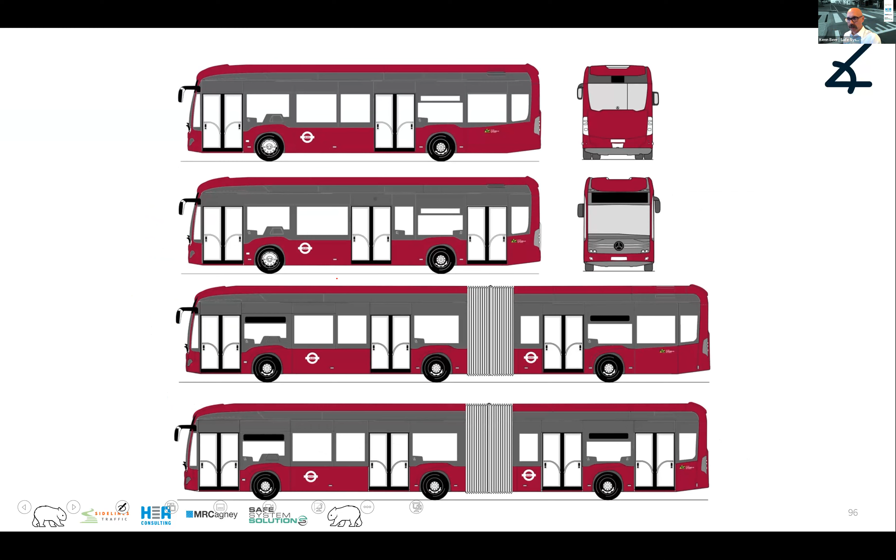So let me talk about buses. The general minimums of buses across most jurisdictions, we're talking about the greater of 100 mil, or 6% between axles, okay, and that's going to be the same off the back there as well from the axle. So as we factor that parameter in, that's your low bus. Commercial buses, so that'll likely be a coach or something like that, will have a bit more clearance usually.

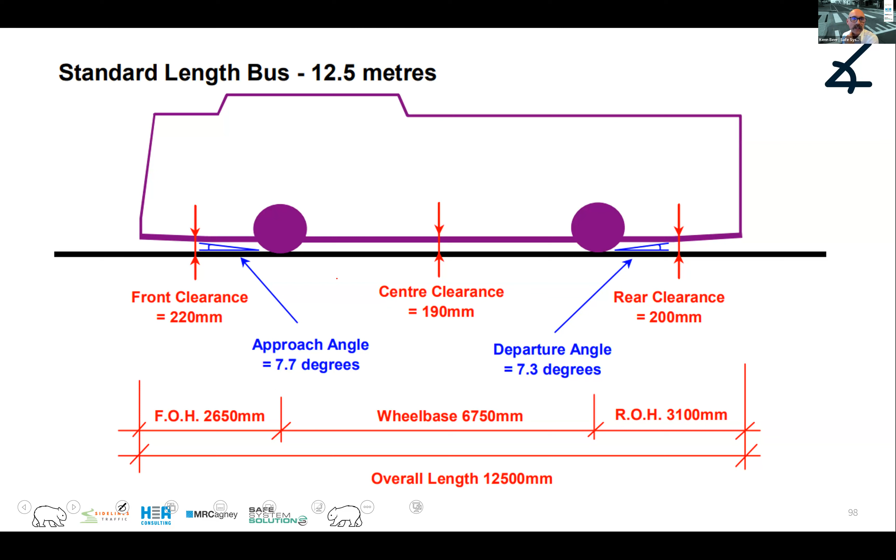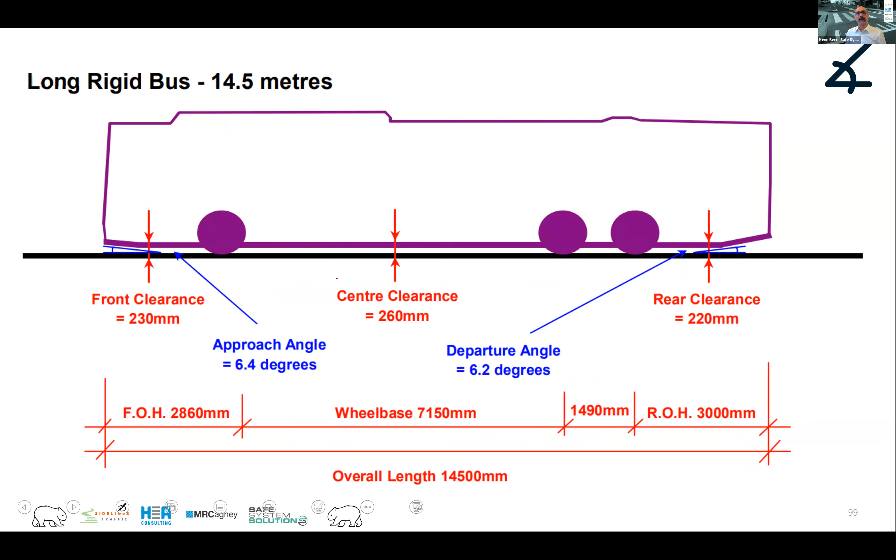And here's some 12.5 meter buses with better angles, and a 14 meter one with a 260 clearance, but again that's a longer wheelbase. So we're seeing that the angles are becoming important. And of course we've got articulated buses as well to consider, with their specific nuances. But to keep it in simple principle terms, your low coach style bus will just bottom out on a 150 mil high ramp before it even gets onto it. It's going to hit it.

The vehicle will sort of go up onto the ramp there, and then there's potential for it to just get stuck on a high ramp, and then drag itself through.

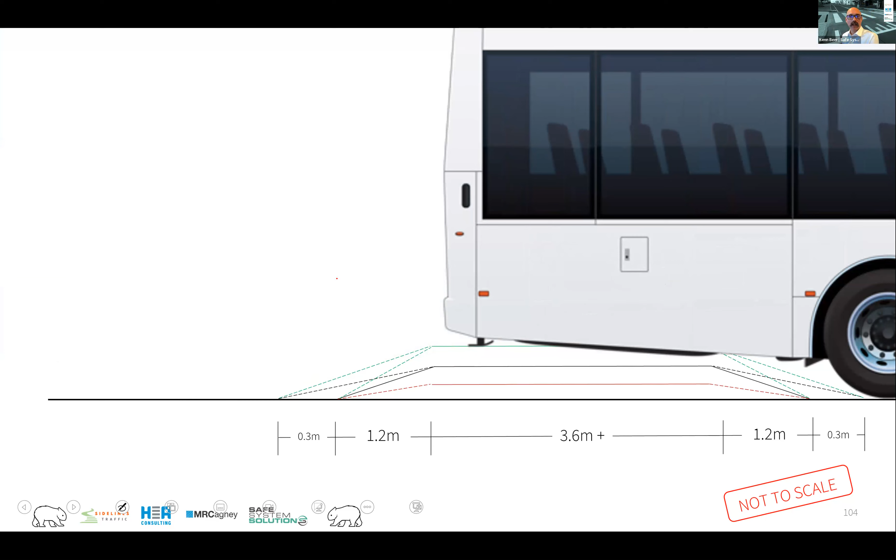But certainly, you can get the specifics of buses if you're in Australia on the National Heavy Vehicle Regulator website. That'll give you a lot of intel, and you want to know your buses that are going to be using the route that you're interested in. We do generally design for ensuring that a coach can get over it. So this one, for example, it's not a bus route. It's not getting the day-to-day, every hour there's a bus, or every 10 minutes there's a bus. But it is still the fact that a coach will come, it goes to the school, picks up kids, once a week. So we've got to make sure we can accommodate that.

But with this 100 high, 1 in 15 ramp grade, the buses are fine. And this is a low bus, this is sort of the lowest you're going to find. So that can navigate over it. Sure, it goes over it slow, but it is absolutely navigatable. So if anybody's saying to you, we can't put that because the coach has to come in here, as long as you're going that 100 mil high and then the 1 in 15, it is traversable, or the vehicle's not meeting vehicle codes.

Where we get to more constant bus routes, we do tend to drop the height down a little bit, to 75, and flatten it out a little bit. And this is where we're starting to make little bits of trade-offs, because we know vehicles, like cars, will go through this a little bit faster. We are going to get good benefit - the crossing's raised, it's clear, and the like. But we've lost a little bit of what we wanted from that. But in order to accommodate the bus in a more friendly manner, so they don't have to go really slow through that - a 1 in 20 or 75, that is really great for buses. It's generally really pretty good for pedestrians too. That's to me a very good setup.

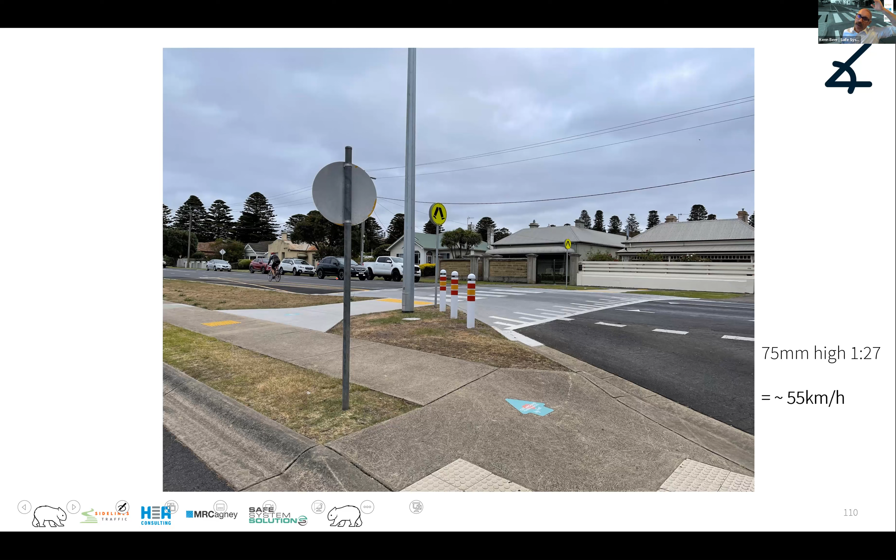This is a bus route, so you're playing around with those sort of things. I think those ones that I showed, that 1 in 20, 75 on a bus route, is really appropriate.

If you're like just absolutely stuck and they're like, no, we can't do it, whatever happens, don't abandon the idea of slowing vehicles on the approach to a crossing point. This, I think, is a legitimate option if we need speed cushions. The bus will straddle it, so the bus can't complain. And we slow vehicles on the approach to the crossing point.

It's not quite as good as a raised crossing, for a couple of reasons. One is we don't elevate the crossing point for the pedestrians, so we lose a bit of value there. Second is you need to actually do it twice, because you need to do it on both approaches. And we always would do both sides of the road like this, because if you don't, vehicles we find just go around it. And that sometimes causes some other challenges.

But you can also do this where drainage just, we can't do it - it's too expensive to do all the drainage works. So here you can see a number of these examples. These ones done with spike down cushions. This one's done an attempt to put some sort of split island there to stop vehicles going around it. I'm not sure how successful that will be. If you're going to do that, probably you need to extend that a little bit further.

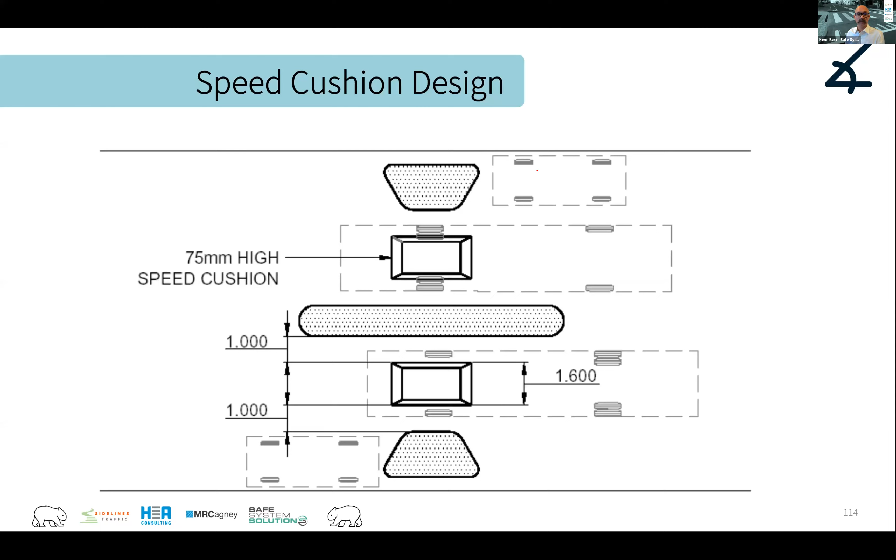So sorry, Ken, to interrupt, obviously I didn't get Zach's question. So Zach has a very specific question about table 8.8, and he's asking, will it be required? I'm not sure, did I show table 8.8? I might have to come back to that. I'm not sure what he's exactly referring to. So Zach, we will come back to you on that question. Apologies, I didn't get your question.

Okay, I better keep going because, as always, I'm going to run out of time.

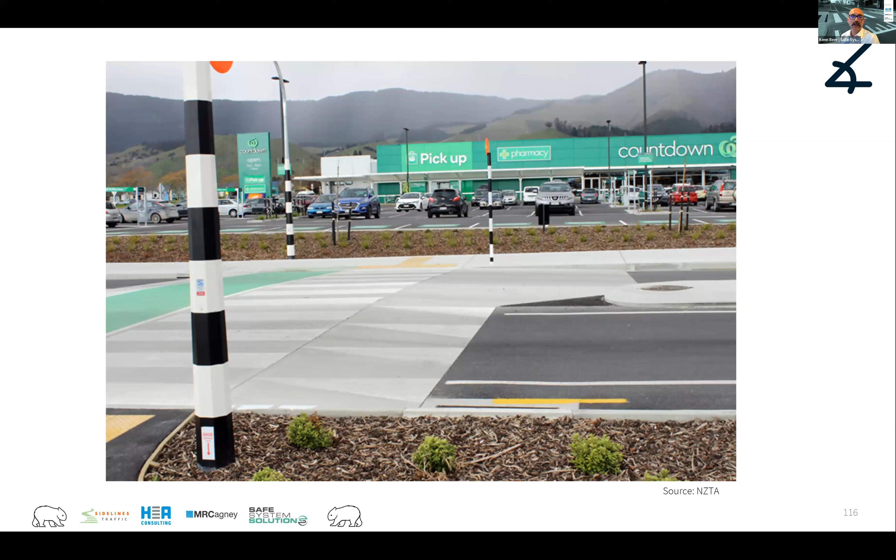So we've generally been talking about a ramp in and a ramp out of the same grade, but you don't need to do that. Here is an example where the grade out, the exit, is much shallower, and that can be helpful for some of your vehicles. This is one in New Zealand, and I think it's been done really well. But a key design element to this is that island - it's got to be a separated road, essentially, at least on the approach, because if you have two different grades, we are concerned that a vehicle may drift into this area if there wasn't any separation, and then have two different levels and be destabilized as they navigate, drifting out of their lane and hitting something.

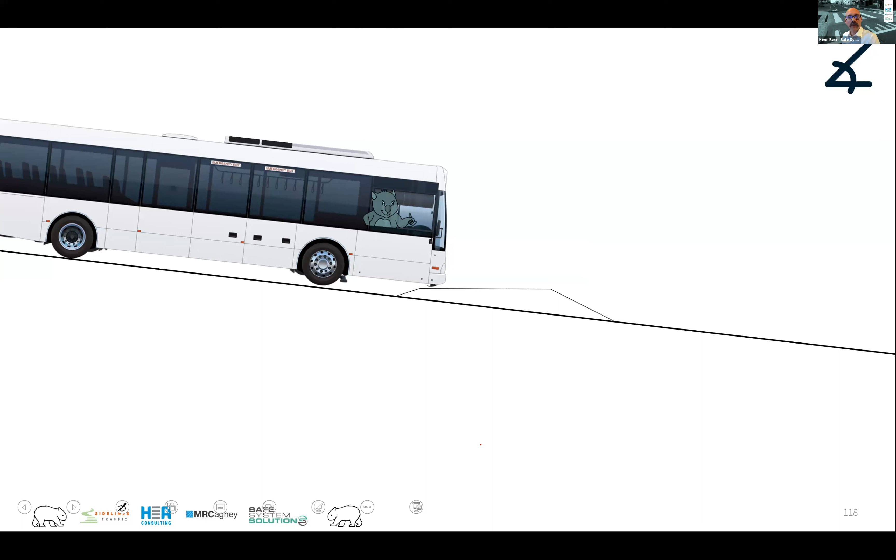We've got to make sure we're getting that actual speed reduction out of it. To accentuate that with an over-exaggerated diagram, if you just create a flat ramp like that, the bus or larger vehicle is going to get stuck on it. So you can readjust and flatten things out, but you're trying to make sure your path isn't overly accentuated.

As you play around with it, you can create facilities by elongating it that help. Bear in mind the vehicles coming down here are getting less and less incentive to slow down, and you've got to think about the vehicles going the other way. In this example, it essentially goes into a bit of flatness and then levels out, coming in with a really long accentuated grade back. There's more cost associated with it, but it does provide that facility.

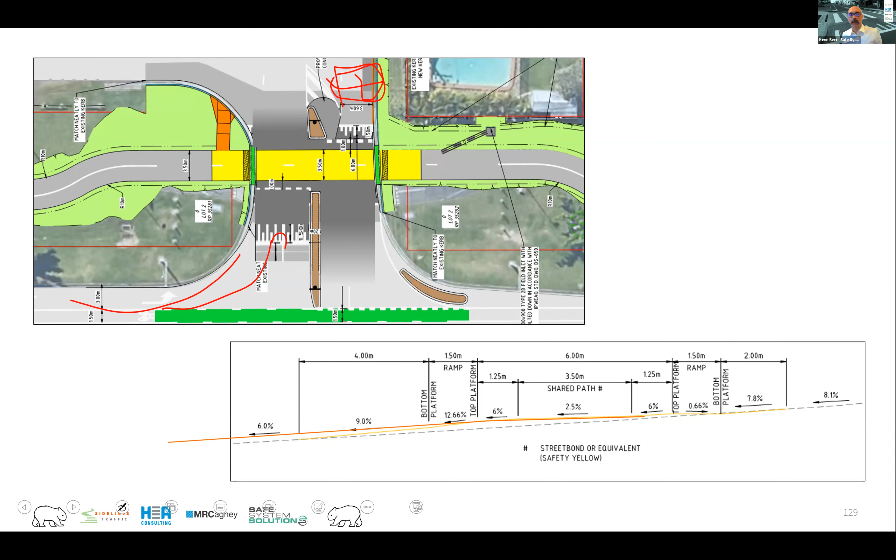In some cases you may just be stuck and go with a speed cushion. You might say we don't actually need a speed cushion because the ability to turn in at speed is all we could possibly do. And there's the speed cushion - that's an example where you're not able to do that.

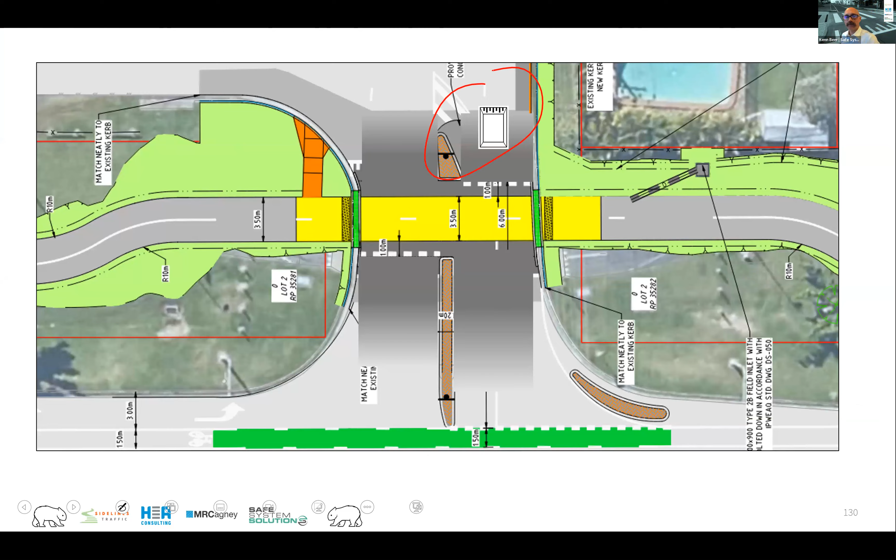Lighting is an important requirement at crossing points, and there's good information in the Australian New Zealand standard 1158 on the lighting of pedestrian crossings. What they talk about is essentially the vertical and horizontal planes that you need to light - predominantly to light up a pedestrian's face as they're crossing, for personal safety. We also want to ensure a vehicle can see the crossing, but that's part of the consideration. I'm not going to go through a full lighting assessment, but I wanted you to be aware of that lighting requirement.

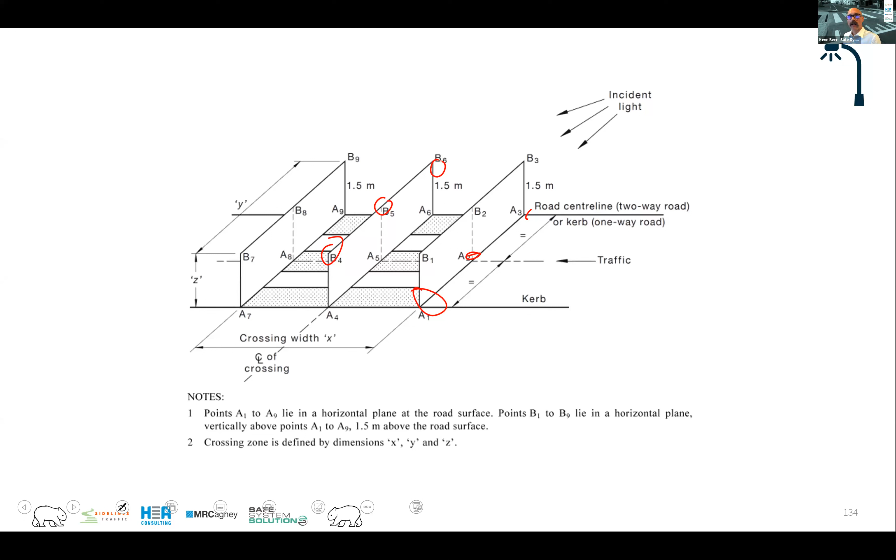There are challenges with light spilling over into properties, and that's a bit of a case-by-case issue. For shared path crossings, you're thinking about the sight line, and that's where you'd want to start to ensure you've got your lighting - the point where the vehicle can see the cyclist. That's the critical point to be lit. You don't need to light the vehicle because they'll have headlights on, and the cyclist will be able to see them coming at that location.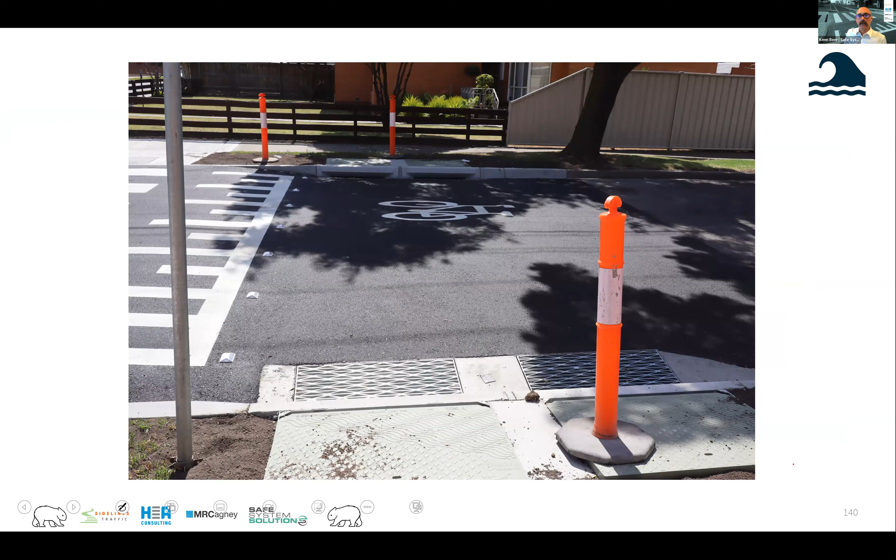Pit and pipes is where we'd love to be going. It's expensive sometimes, but it gives us the ability to keep that ramp clear, and you may need to increase the capacity there. Here they've put in some extra pits. So that's one option, but expensive.

Then there's the idea of some sort of box drain where you keep the channel there and put a plate over the top, essentially, so the water flows underneath. Somebody rightly pointed out earlier the leaf litter and clutter associated with this, and that's certainly something to be aware of.

I do like this facility due to its lower cost, and I see a few of them out there. But it was something of note on an audit we were doing, where it was only open for a couple of weeks and was already clogged. So that's not a great outcome — something we need to factor in.

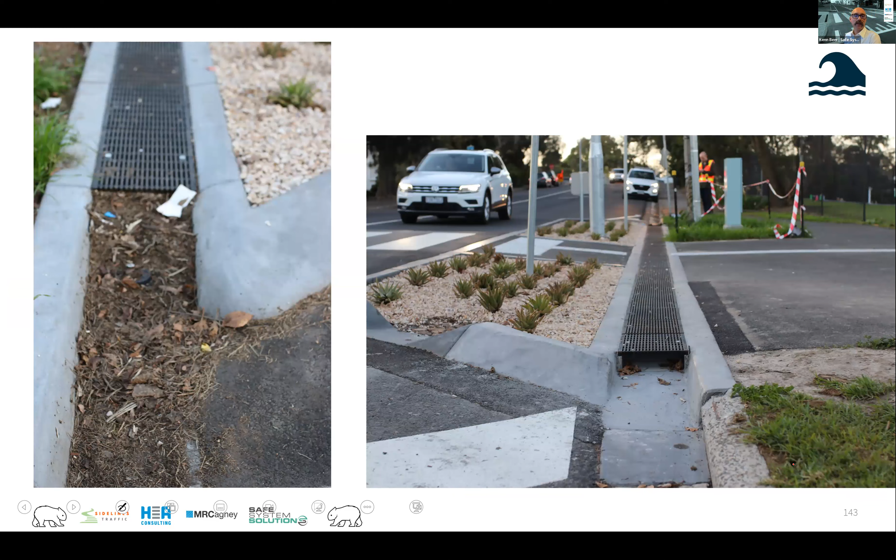Some different setups here utilize the facility with an entry spot into a little swale area, which is nice. I've seen some places use that as a bit of a water sensitive urban design area, where they can use that space — the landscape architect's dream spot — to add some features in and around it.

When we go with just keeping it clear like this, ramping down and ramping back up, we're considering mobility scooters and the like. Are they going to get stuck on this? Are we going too sharp down and too sharp up?

These ones are good and work quite well if you've got a fairly flat area, because you can come in fairly flat and ramp it up, with a bit of space to play with. I like this a lot.

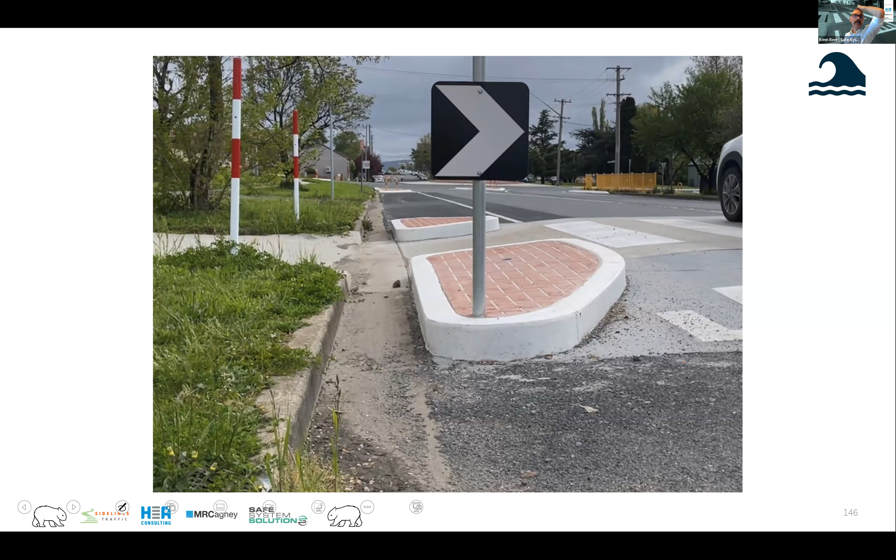It's cheap, it gets us what we want, and it can be utilized really easily and well if you've got the space and the specifics there. You can see a few of them here that I'm fairly happy with — I think they've done really well.

Where you do have that higher drop down and up, I think we start to get into some problems. People may get stuck on that, and that's where we might be looking at some sort of plate over this.

We're slowing vehicles — if it's clear, they will slow down and stop. And it's a hell of a lot cheaper than trying to put pits in and get water through. So I'm a bit torn on this.

But Hafez, I really love when you are quite practical, because we have limited time and budget. So it's very good to be practical.

One question from Farhana: what are the issues we need to consider when designing a raised crossing on a slip lane in an urban environment which has heavy vehicles and high speed sometimes?

You just need to think about the grades and try to find the appropriate grade. Some of those examples I showed with the 75 ramp height are good — certainly don't be dissuaded by that. If you've got pedestrians and cyclists crossing at that point, we want to slow vehicles down, that's it. So yeah, just play with your ramp grades and heights, I think.

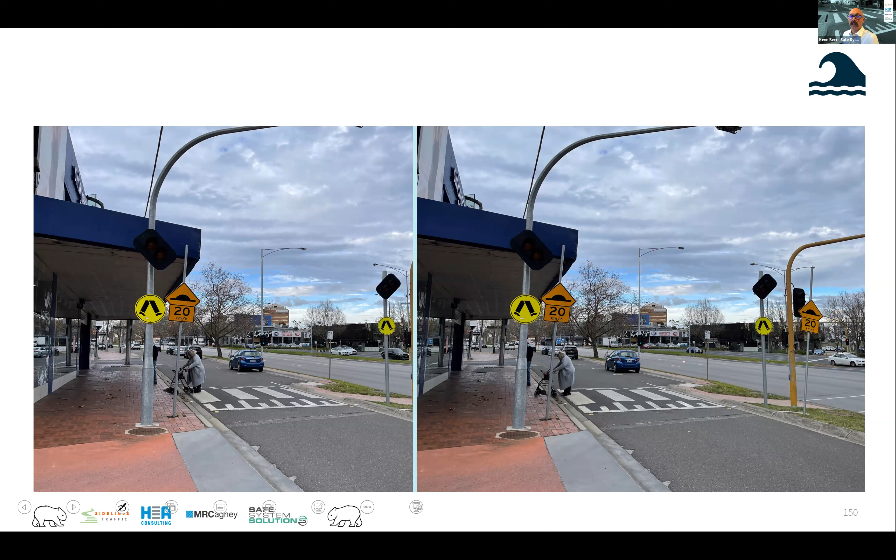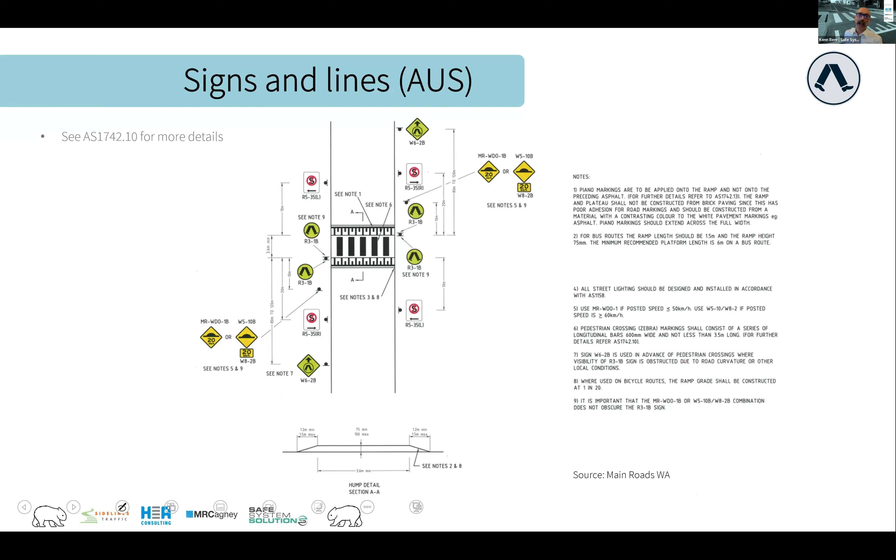Signs and lines — really, we go to 1742.10. It's well described how to sign a raised crossing in Australia. It's fairly clear: we give a warning of the raised nature of it and the regulatory crossing point.

Yeah, a couple of explanations of that. We do that - advanced warning of the raised nature of it. I want to combine them. I keep putting this out there, saying we've got too much sign clutter on the approach to these. Can we combine a few?

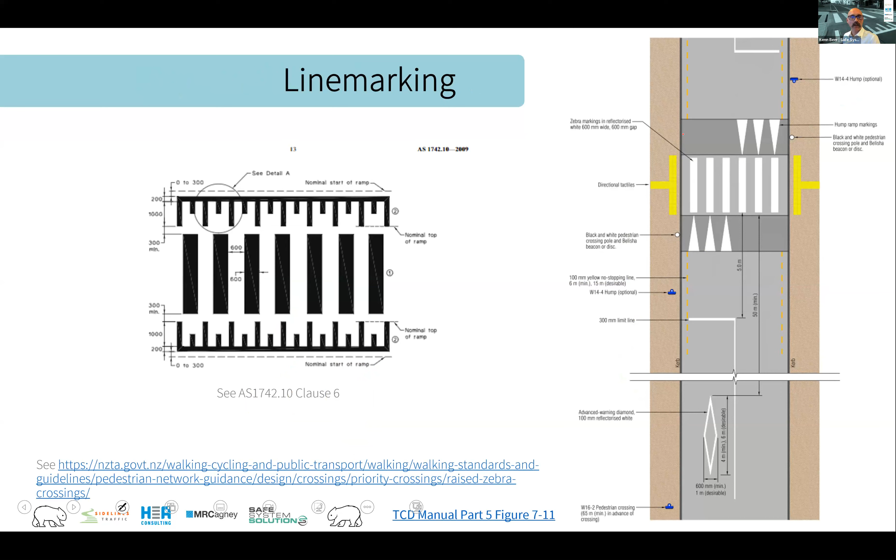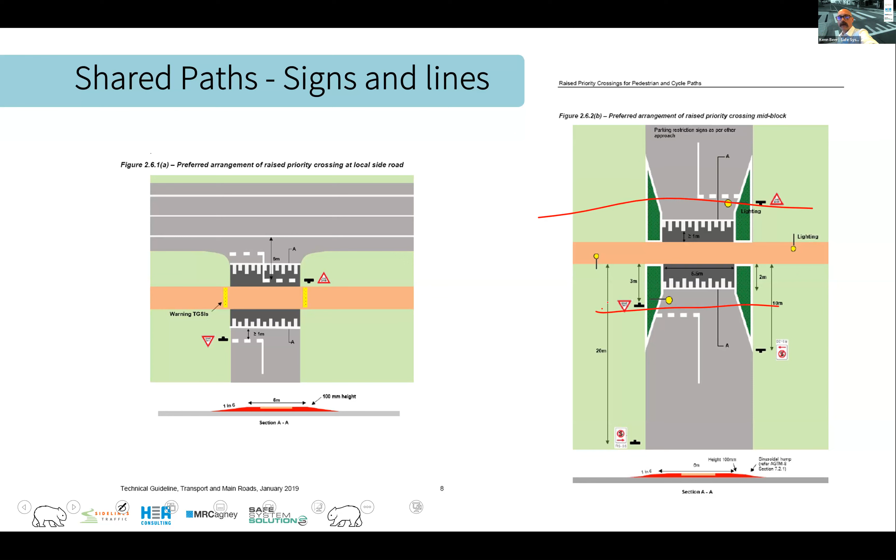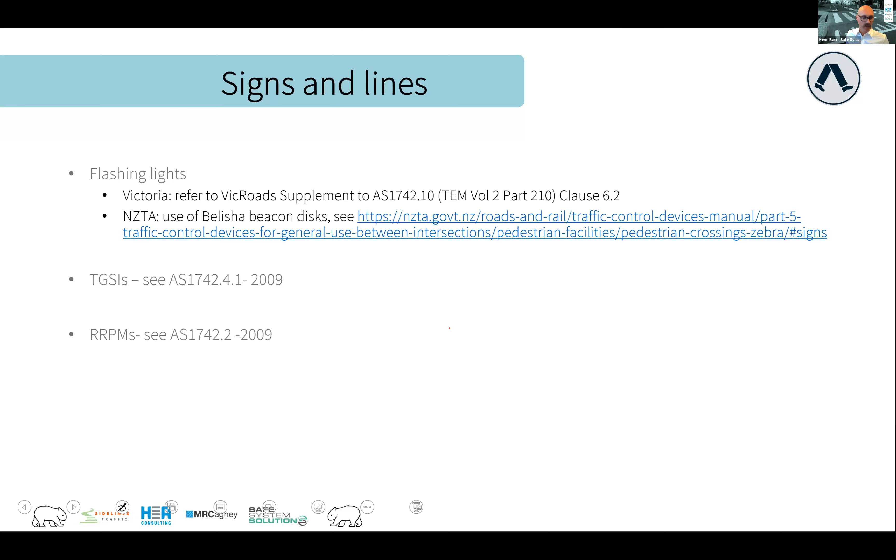And some information here on the signs from Queensland, which is associated with essentially creating this as a road. So you have give-way signs, and then you have the shared path as a road, and we use give-way and then pedestrian and cyclist symbols underneath as supplementary. In the notes, you can see the information about signs and lines, but also when you might use flashing lights or not, tactile ground surface indicators and raised reflective pavement markers as well, and shared use crossing. I really just popped all that in because I knew I wouldn't get time to go through it all, so I've pointed you at the specific notes for that.

We want to contrast the color of the crossing. Red's not recommended - not enough contrast for visually impaired people. So black on white is what we're really looking for.

And finally, pavement - you've really got options of asphalt or concrete. You want to do a bit of a dig out here to ensure it lips in if you're doing that with asphalt. If you do it with concrete, it'll last longer. It's more expensive though, and takes more time, but it's much easier to get a nice wedge in that.

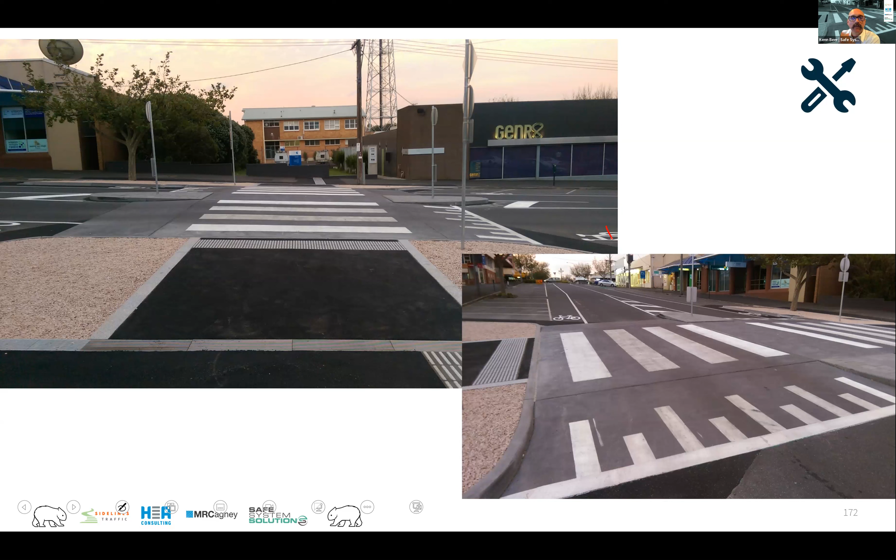You might need to do a little bit of potential pavement strengthening around the approach, as somebody mentioned. I haven't seen and done too much of that or know too much about that. You could think about some speed calming on the approach to lessen that a little bit.

And that's probably the point I wanted to get to. I'm going to stop sharing, just bring up the learning management system to show people how to finish. While Hafez, you tell me if there's any final urgent things that need to be covered. No, nothing - I'll just thank you for putting the energy in and getting us to the end. That was a feat, thank you.